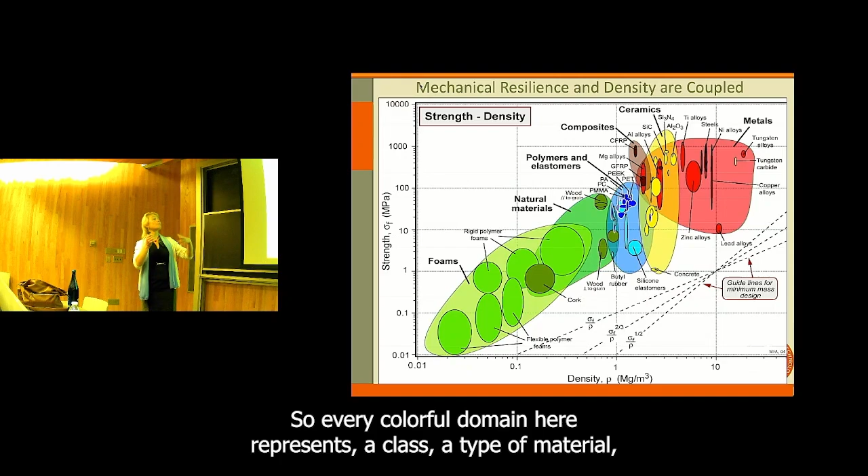Okay, awesome. All right, so every colorful domain here represents a type of material, a category of materials that we know how to make today. And so the picture that emerges right away is that we're very good at making materials that are simultaneously strong and heavy, or lightweight and weak, right?

So what we're not yet so good at is getting into the so-called white space, where materials can be simultaneously mechanically resilient and lightweight. Now, this is a log-log plot, so even a small increment within the space already represents a substantial change. So the question was, this is 10 years ago, how do we get into this white space if everything we know how to make today is already plotted here?

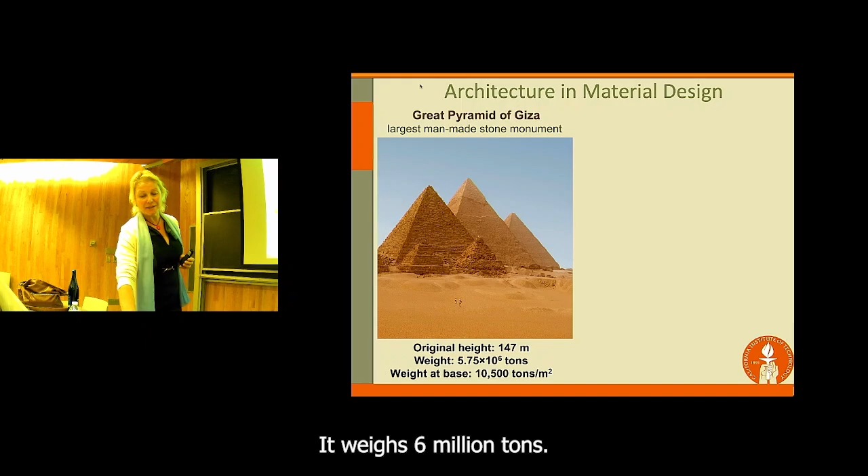So the way we thought of it is by applying this concept of architecture to materials design. So if you look at the largest man-made stone monument, this is the Great Pyramid of Giza, it stands 150 meters tall, it weighs 6 million tons, and certainly not a very elegant structure, I would say. So then, in contrast, the Eiffel Tower stands twice as tall, and it weighs 3 orders of magnitude less. And as far as I know, they're both still standing, right?

So what that tells us is that by properly architecting your structure, you can actually get away with using a lot less material without any sacrifice in the mechanical strength.

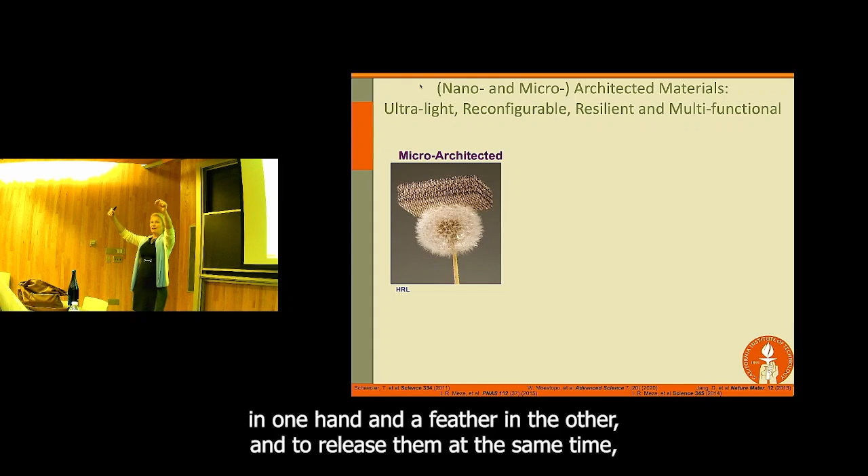So when we first began this research, we were collaborating with HRL, and we made an entirely nickel microlattice. So what you're looking at is the world's most normal dandelion. There's nothing photoshopped here, nothing unusual here, just a normal dandelion in Malibu. And this nickel microlattice is sitting on top of it, hardly perturbing it at all. In fact, if you were to hold the microlattice in one hand and a feather in the other, and release them at the same time, the feather would fall down faster. So they're very, very lightweight.

But to get to the simultaneous attainment of strength and lightweight, you have to go down 3 more orders of magnitude in the dimensional reduction. So all of these black and white images you're looking at here were at some point made by students in my group, and they're black and white because these are scanning electron microscope images.

You can see that there's an obvious level of porosity in that they're all cellular solids. There's a less obvious level, in that the nanoscale building blocks comprising them can be made hollow, with wall thickness on the order of 10 nanometers. So the smallest dimension in this entire solid that looks like a solid cloud sitting on your hand is only 10 nanometers—it's 99.9% air.

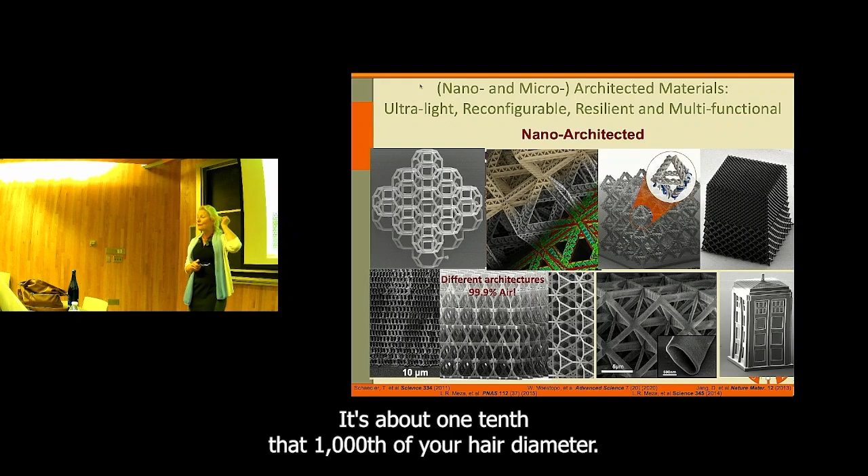Those of you who are fans of Doctor Who, here's a microtardis. It's about 1/1000th of your hair diameter—very small. We're not limited to periodicity. We can make very sophisticated structures, and I'll tell you a lot about this later. But basically, this is possibly the way—architecting and maybe combining these nanometer length scales with the size effect.

So what we're creating is ultimately not really a structure and not really a material—it's both. This is why we felt it was appropriate to call them structural metamaterials. Now, hopefully I've convinced you that these are very lightweight, but I have yet to show you that they are in fact strong and mechanically resilient.

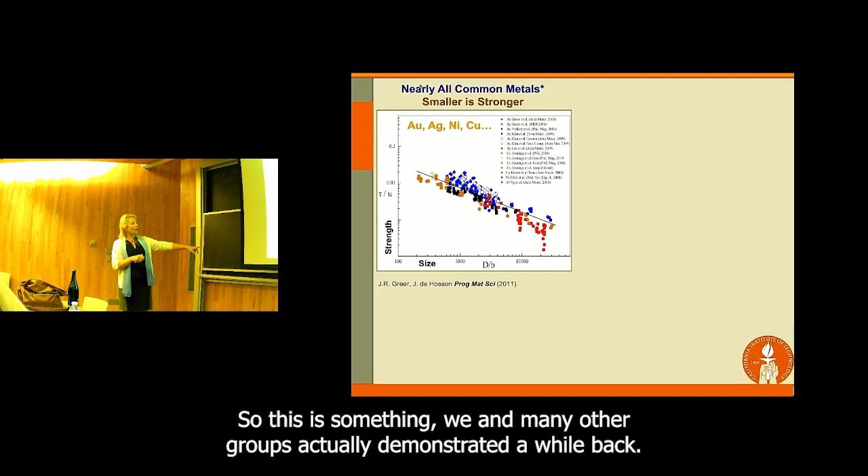This is something we and many other groups demonstrated a while back: if you plot strength as a function of size for common metals like gold, silver, and copper in their single crystalline form—meaning not defect-free, but without grain boundaries—we observed this ubiquitous smaller-stronger size effect. This is a power law type strengthening. So if you take something very malleable like copper and reduce its dimensions to about 200 nanometers, it becomes as strong as steel. Smaller, stronger size effect.

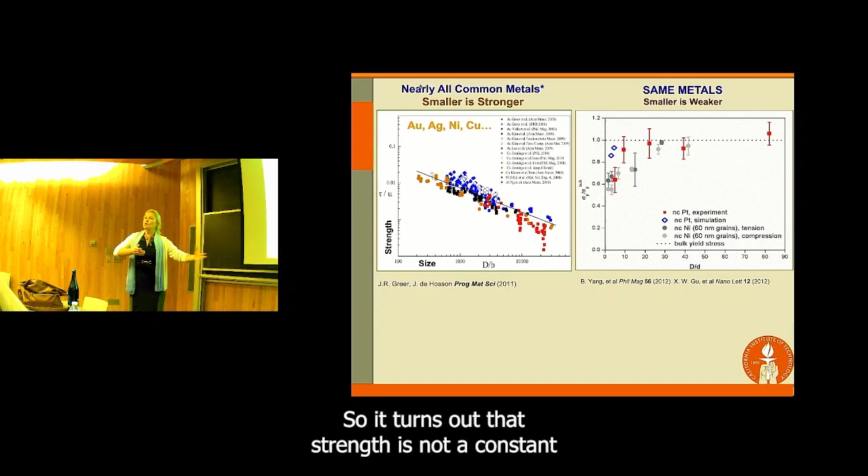Now, take exactly the same metals and deposit them using a different technique, for example thin film deposition, and suddenly this effect is reversed—smaller is now weaker. This is a more modest size effect, no longer on the log-log plot, but it's non-negligible. So it turns out strength is not a constant, like maybe some of you are learning in classes, but it's dependent on size when you get down to these nanometer length scales, like the architectures we were describing.

Here's another example of a size effect: this is a glass rod about 150 nanometers in diameter, and we're pulling on it at room temperature. Watch what happens—it's glass, room temperature, not hot. It's deforming, forming a neck, and deforms by about 100% strain prior to failure. Glasses aren't supposed to do that. Anyone who's really tried this, maybe with a piece of chalk, knows this isn't supposed to happen.

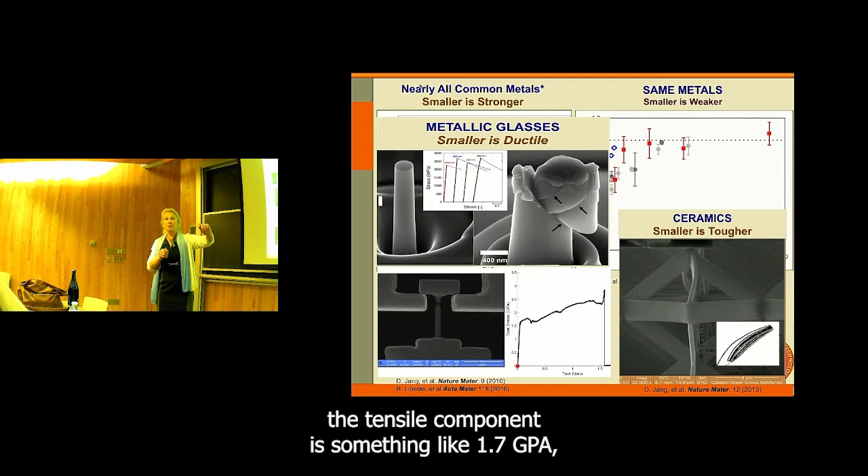Here's the last example: this is a titanium nitride single unit cell of one of those nano-architectures—a very, very brittle ceramic. This beam is bending under global compression. If you calculate the von Mises stress and then the tensile component, it's something like 1.7 GPa. Ceramics aren't supposed to stay intact under 1.7 GPa of uniaxial tension. This one is doing it over multiple cycles, and it'll keep doing this, I promise you.

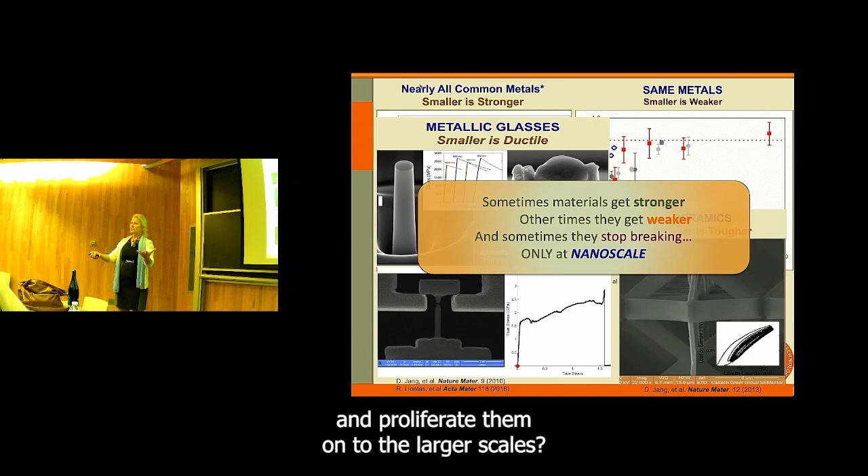So the takeaway message is this: sometimes materials can get stronger, sometimes they get weaker, and sometimes you can suppress brittle failure. But all of these effects emerge only at the nanoscale. So the big question to ourselves about a decade ago was: can we somehow harness all of these beneficial size effects and proliferate them onto larger scales? This is where architecture comes into play—can we combine these two phenomena into creating an entirely new class of materials?

So I want to spend a few words describing how we make them. This is a technique called two-photon lithography.

I have a question for all of you—do you have an instrument called the nanoscribe here? No, but we know. You know what it is. Many of us know what it is. Okay, I highly recommend it.

So this instrument is called—there's this company, Nanoscribe, that makes it. It's a two-photon lithography instrument, and the way it works is that it's an IR laser, and in a single voxel it releases exactly 2 photons.

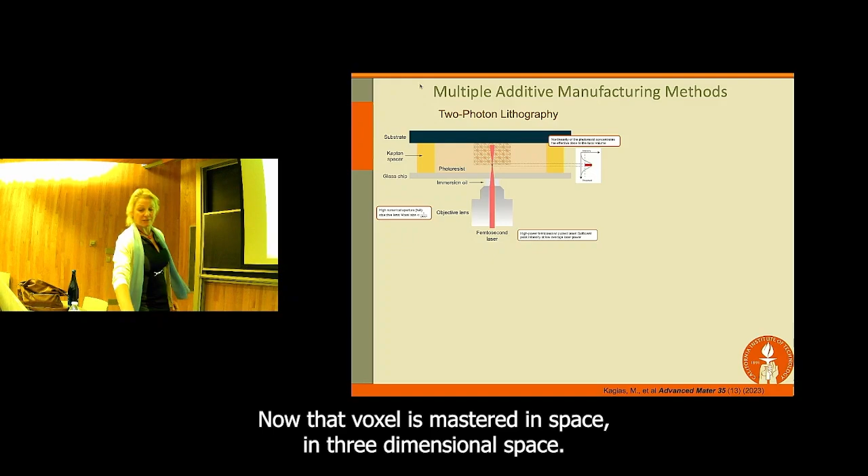And so this is how you can bring down the resolution to submicron and have a sufficient amount of power to cross-link the photosensitive resin within that voxel. Now that voxel is rastered in 3-dimensional space, and as it's traveling in space, it's cross-linking whatever shape it's trying to make, so we can write a nano version of each one of you.

Complexity comes for free. There's no mask, there's no periodicity, and that's how we were able to make things like the micro-TARDIS, for example.

So this is the speed at which it writes. How many of you think that this is fast? How many of you think that this is slow? Okay, and the rest of you are just not convinced. That's okay.

So it depends, you're right. Basically, this is great for lab research, but it's not great for manufacturability. If you wanted to make an entire world nano-architected, which is what I want to do, we can't really use the nanoscribe for that. So you have to figure out a way to expose maybe an entire sample or an entire field in a single laser exposure instead of a single voxel.

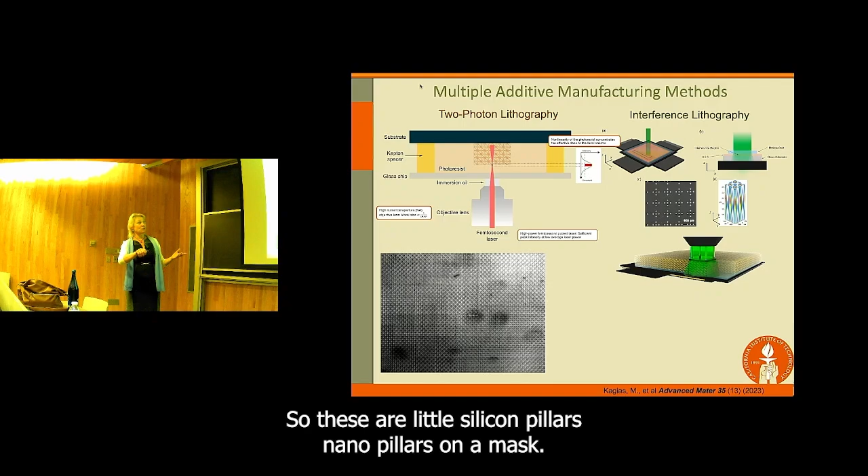And so for that, we developed a different technique that utilizes a metasurface mask. These are little silicon pillars, nanopillars, on a mask. What ends up happening is that when you shine a different kind of laser, a green laser, it creates a pattern of standing waves like so. All of these high intensity points also provide a sufficient amount of power for a different photosensitive resin to cross-link, and the entire field can then be cross-linked in a single laser exposure.

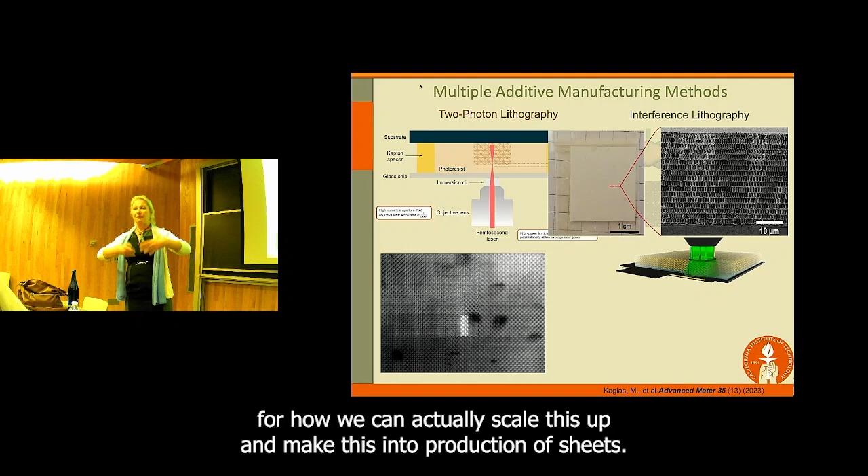What ends up happening is that you have, for us, this is very big - it's an inch by an inch sheet of paper, effectively. And when you look in the cross-section, you can see it's fully nano-architected. So this is one way for how we can actually scale this up and make this into production of sheets. That's another technique that we use.

And then we also, of course, are very versatile in terms of the 3D printing capabilities. In fact, my mischievous grad students made some very poisonous gummy bears, so I had to put big boundaries everywhere saying please don't eat these, because they're very, very poisonous, but very realistic looking.

Okay, so most of the samples we work with are kind of nano or micro scale, and we're not able to see them with any kind of optical technique. So this is a scanning electron microscope equipped with a nano-mechanical module that is capable of perturbing them in various mechanical and electrochemical ways at different temperatures. And these are different acquisition devices.

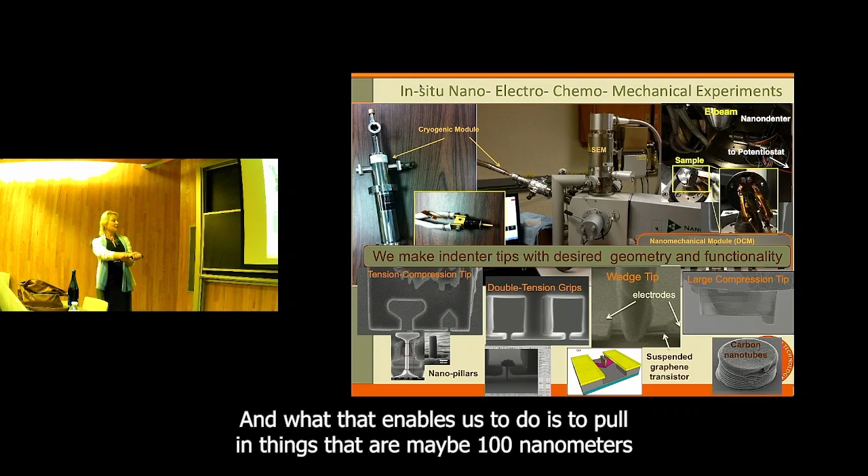So these are the kinds of grips that we make ourselves out of diamond. And what that enables us to do is to pull on things that are maybe 100 to 200 nanometers in diameter, as well as to perturb things that are many hundreds of microns in diameter. So there's a multitude of scales that we can probe.

Okay, so now that I told you how we make our samples and the hypothesis that we're trying to probe, here's the big experiment. This is my former student, Lucas Meza, who was first to do this experiment. This is an octet nanolattice. An octet is just a type of cellular solid that is stretching dominated, so it's supposed to be the stiffest of the classification. The wall thickness here is about 50 nanometers, so very small.

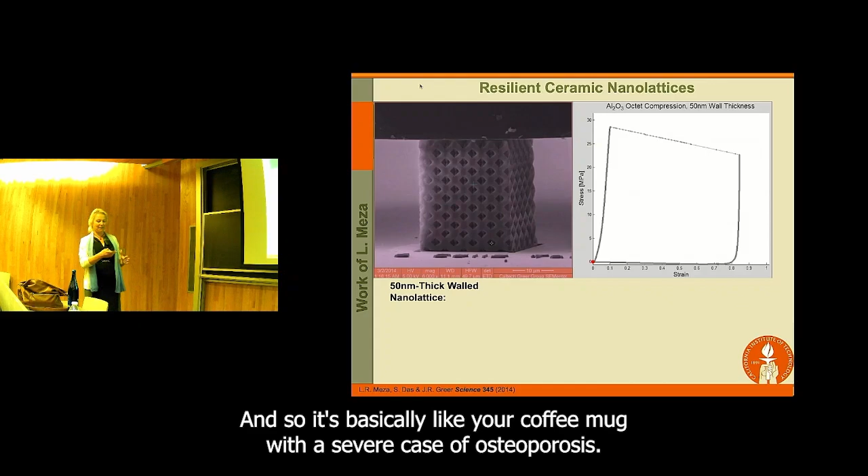It's about 99% porous. Now, how many of you know what atomic layer deposition is? ALD. Okay, alright. So in the ALD community, they'll tell you, we can deposit anything you want as long as it's alumina. So here's alumina, a very brittle ceramic, ALD deposited. It's hollow on the inside, so it's basically like your coffee mug with a severe case of osteoporosis.

And so when we compress it, of course, we're expecting nothing more than for it to crush and die and to shatter, and nothing interesting happens, basically, right? So that's exactly what we observed - a little bit disappointing, but we predicted this, right? So it crushed and died.

So now let's repeat this experiment, and the only thing that we're going to do differently is we're going to reduce the wall thickness by a factor of 5 - so instead of 50 nanometers, we're going to go down to 10 nanometers.

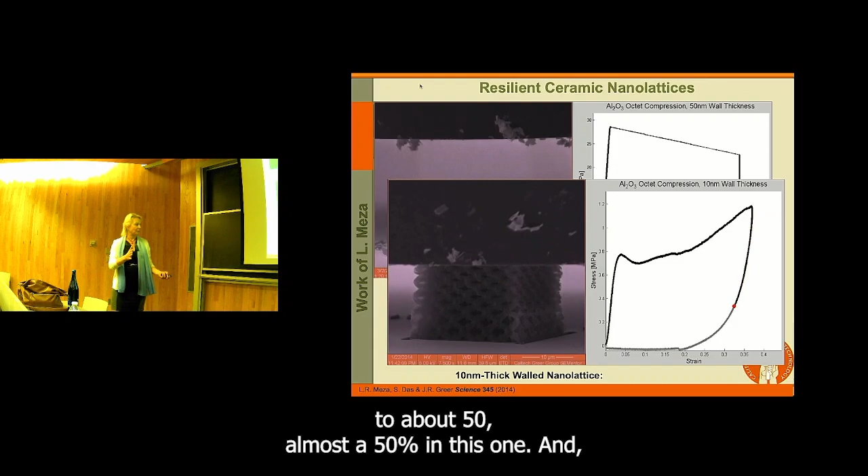Same alumina, amorphous, no dislocations, no grain boundaries, nothing of the sort. And we're going to compress it so it should be even more susceptible to failure, right? So now we're compressing it. It's very, very brittle, very ceramic, very open. We're compressing it to almost 50% in this one. And this particular ceramic thinks of itself as a sponge, so it fully recovers.

So if that doesn't convince you that there is, in fact, a size effect, I'm just going to fly back to California right now. This was a big finding for us. We hadn't expected this to happen. So now that we saw this, I'd like to show you all the things we've learned in the last 10 years since that very first set of experiments.

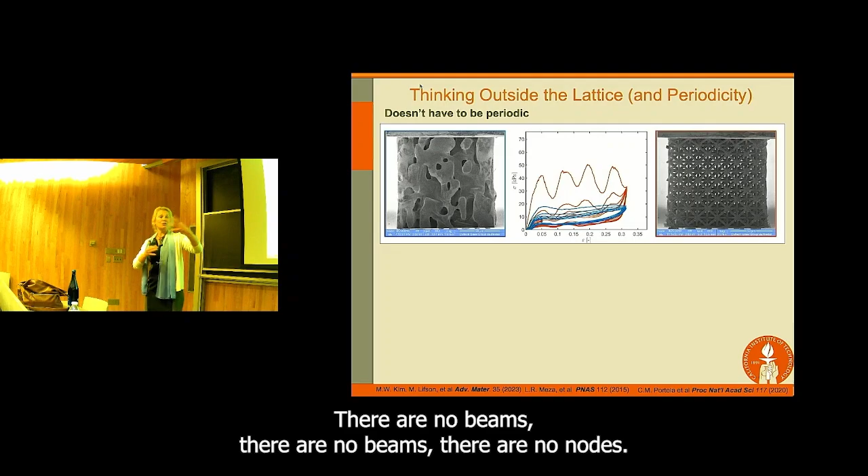The first thing we learned is that the nanolattices don't have to be periodic. In fact, they shouldn't even be called nanolattices. These nano-architected materials were made by my former student, Carlos Portela, who developed these nano-labyrinthine alumina architectures that are all shell-based. There are no beams, there are no nodes. And you can see that every time there's a hysteretic type of behavior, there's a lot of energy dissipation occurring, and there's always full recoverability.

The second thing we learned was that the structure doesn't have to have homogeneous density. In fact, you can incorporate different regions. This bottom part is more compliant, so it's fully densifying before the top part is even aware that it's being compressed. You can also see that reflected in the stress strain data. So now we can build in trajectories of deformation or even failure.

This is something new to us, studying fracture in these nano-architected materials. But we now understand how we can pre-design the trajectories into these materials. It turns out they're also very good for controlling breakdown voltage and supercapacitors. So there's multifunctionality that comes with these mechanical types of materials.

This is a hierarchical nanolattice. Each individual beam is now comprised of self-similar unit cells. And now what you're observing as you're compressing it is that there's kinking occurring in the lowest degree of hierarchy. So we're really expecting it to shatter right here, for catastrophic failure to initiate at this stress concentration—and it fully recovers.

So what we're learning is that hollow, brittle nanoarchitectures recover under complex stress states, in complex shapes, and under every kind of deformation. So this is not unique to periodicity. This is not unique to any kind of lattice behavior. Rather, it's a function of the combined size effect with the nano-architecting type of approach.

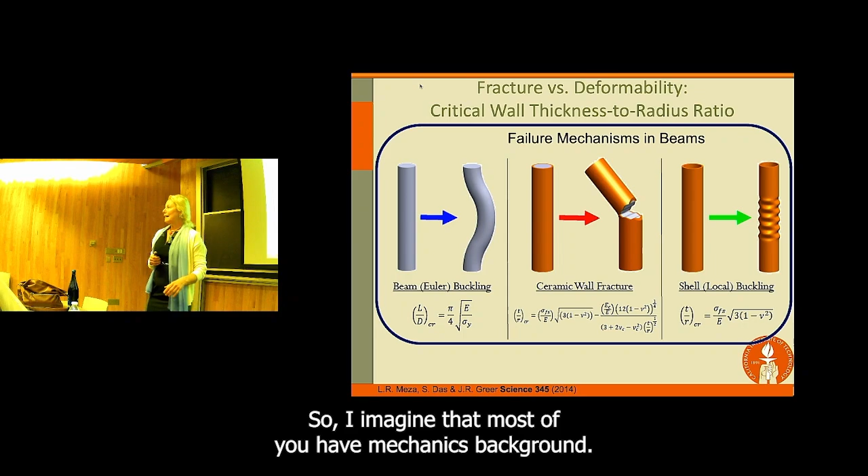That hollow—this is very important, actually. They're all hollow architectures. I imagine that most of you have a mechanics background. So we, of course, tried to understand why this happened. This is very unusual behavior, right?

So there's an elastic instability called shell buckling that could be the root cause of this. Like, that could be causing this. So as we're compressing a hollow beam-based architecture, maybe the reason why it's able to spring back is because it's experiencing buckling. So there's this type of criterion we can set for failure.

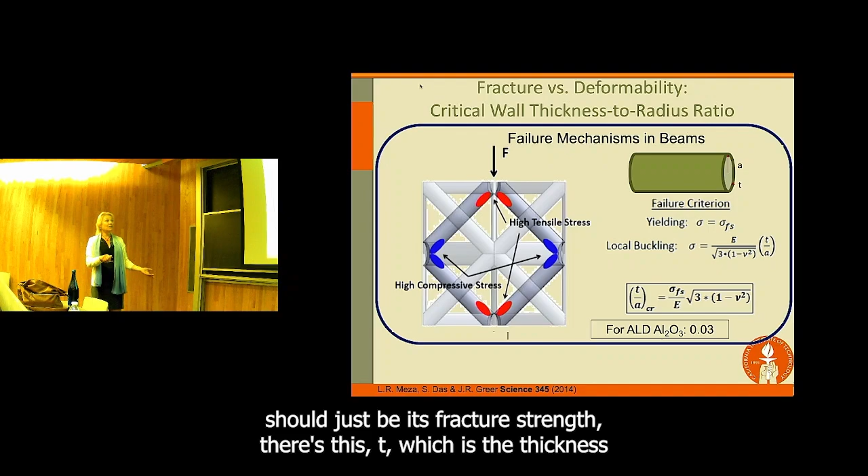So if we set up the criterion for local buckling and set it equal to yielding, which for a brittle material should just be its fracture strength, there's this T, the thickness of the hollow beam, and A, the radius of the hollow beam. There's this ratio, T over A, that can be calculated. This critical ratio implies that if the ratio is higher than that, your material will fail prior to buckling. And if it's lower than that, you should experience a structural response where you see buckling. So let's see what happens here.

So this is what mechanics tells us, right? It turns out that for the 10 nanometer wall thick nano architecture, the octet, that ratio is 0.016, so that's below 0.03. So it makes sense that it recovers. You can see in the data, these are different unit cell sizes, different relative densities, and it recovers every time—the sample looks very similar before and after deformation.

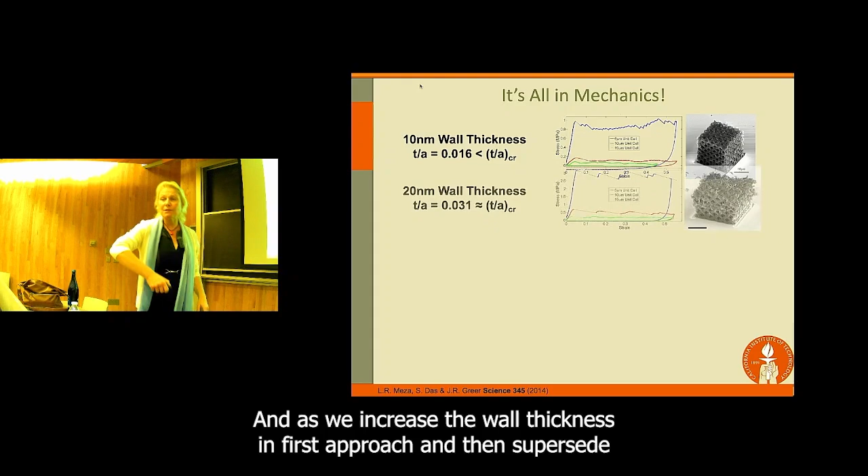And as we increase the wall thickness and then supersede that critical thickness, you see the deformation becomes a lot more catastrophic, a lot more jerky, and this last one just basically dies in a single burst.

So it seems like the answer lies in mechanics. Mechanics tells us everything, which is really great. If we were to build a building that's 10 centimeters thick with 3-meter diameter tubes made out of concrete, and then a giant came and stepped on it, the whole building would spring right back, just like our nanolattices. That's what mechanics tells us, as long as T over A is scale-free and continuous. It should work across scales, right?

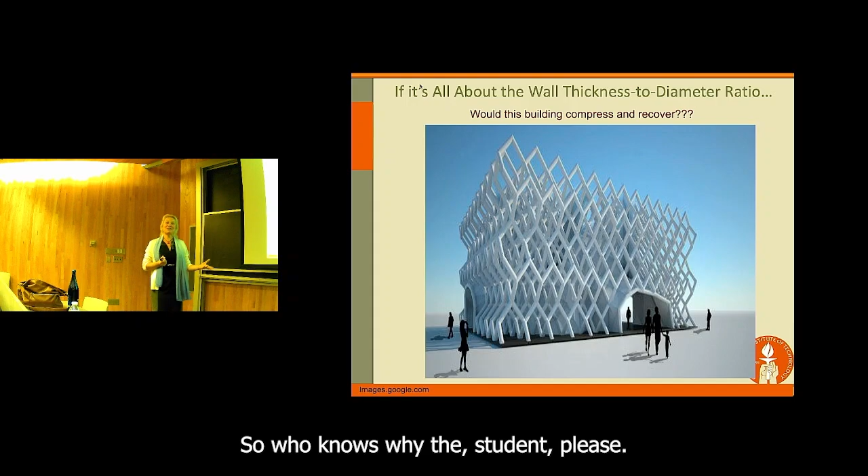Okay, well, good that you're smiling, because of course this will never happen. So who knows why? Where is the size effect here? How does the size effect manifest itself so that this would never happen in a building with the same T over A ratio, but it does happen in the nano-architected material?

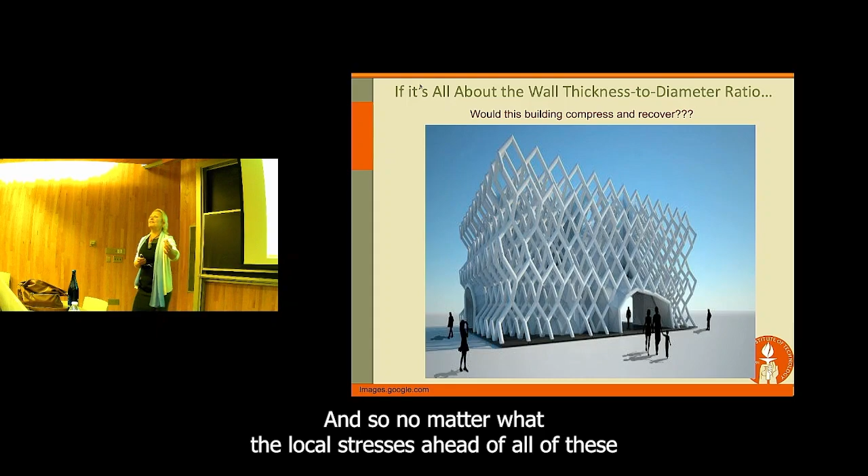Well, it begins with an F and ends with 'laws' - flaws. Brittle materials fail at flaws. The probability of finding a very broad distribution of flaws in something 10 centimeters thick is 100%. No matter what, the local stresses ahead of all these microvoids and inclusions will always exceed the material's fracture strength, so before the structure even gets a chance to experience any structural response, the material fails locally.

In contrast, in something only 10 nanometers thick, the probability of finding a flaw is much lower, and the size of the largest flaw is only 10 nanometers. So the size effect manifests itself in our ability to make much closer to ideal materials. If we filled this room with concrete, it wouldn't be as high integrity a material as the same volume made with nano-architected structures out of the same solid constituent.

Okay, so it's all about the defects - this is also very important. The natural question after that was: since we observed that the hollow, brittle building blocks always recover, what happens in the monolithic ones? Carbon seemed to be a good material for that.

So this is now monolithic - fully dense carbon. This is a carbon micropillar, and we're going to compress it. You've all written with pencils before, right? This is effectively pushing really hard on a pencil. Here we are compressing a carbon micropillar, and as we compress it you can see the stress scale - we're almost at 4 gigapascals compressive stress on carbon.

And it's certainly not enjoying itself, but it's not fracturing. It's bending, it's barreling, it's doing a lot of things. We're up to 7 gigapascals, and it's still not fracturing. That's unusual - this carbon thinks of itself as rubber.

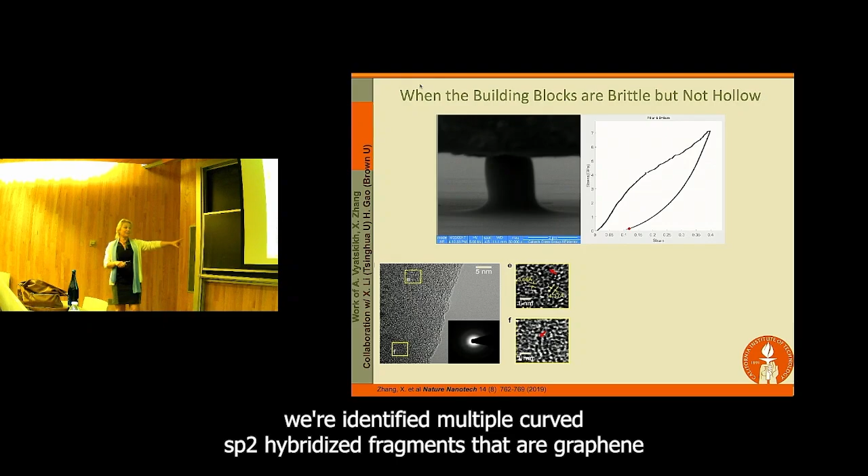Okay, so the first thing we had to do was explain why this happens. When we looked closely at the microstructure of this carbon, we identified multiple curved sp2-hybridized fragments that are graphene-like. Upon global application of axial, uniaxial stress or strain, they're able to transform in shear transformation zones distributed throughout the pillar, so that prior to any failure, they accommodate all of the axial stress through these shear transformations. These local shear transformations don't coalesce into brittle failure, or any kind of failure, for a pretty substantial amount of deformation.

To confirm this hypothesis, we collaborated with a group at Tsinghua University - Xiaoyan Li's group - who was able to reproduce that very same microstructure in their MD simulations. And then, of course, my former advisor Bill Nix always presents this challenge to me: don't believe anybody who tells you about ductility in compression - you can make anything ductile in compression.

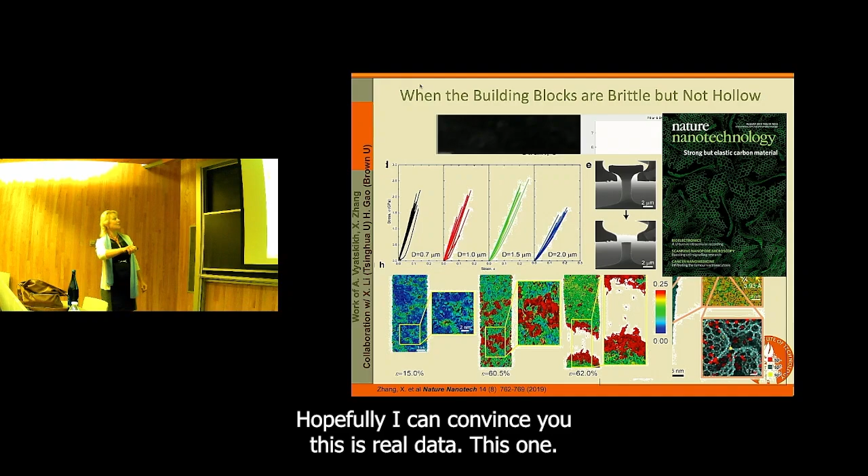So here's some tensile data - hopefully I can convince you this is real data. These are our carbon micropillars that very clearly show ductility up to about 20% strain at room temperature, so it's real. It turns out that our hypothesis was in fact true.

There are these small shear transformation zones, and you can see where the strain is localized into these. It's localized to a very high strain prior to failure, and only then does failure occur, once they coalesce and form a percolating path through the entire sample. So here we are - we made nanoscale building blocks that are fully recoverable.

We know why they recover. This is going to work great. Carbon is cheap, carbon is stiff, carbon is great. So we're going to go architect, right? March forward and architect with these.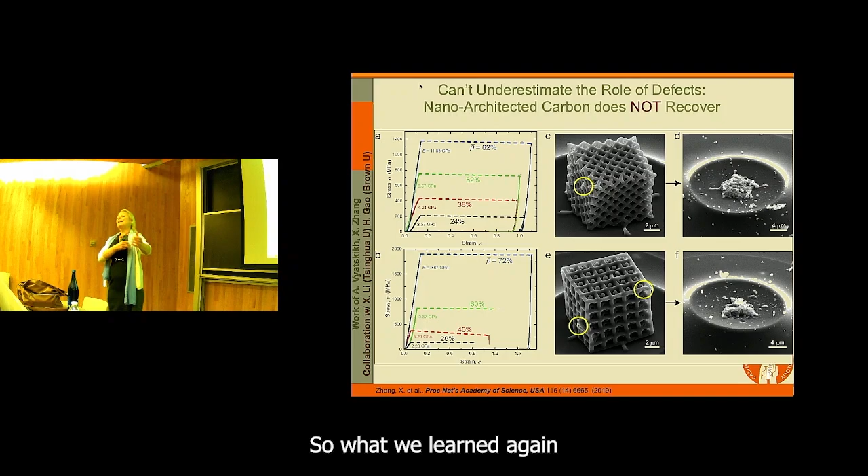What we learned, again, smacked in our faces, was that the importance of defects can be underestimated. So basically, every single time, the stress concentration at every junction was the cause of failure for the entire structure.

Having said that, I want everyone to appreciate this: brittle materials that are hollow always recover, while brittle materials that are monolithic never do. No matter what you make out of this, at least in our experience.

I want to bring everybody back to the white space structure parameter space that I showed. This is what I showed you before, and it looks like by just nano-architecting, we are in fact able to get into the white space. This is from a long time ago, so hopefully many of you can do better than we used to. So this is clearly a pathway to get into the white space, this combination of architecting with all kinds of nanoscale building blocks.

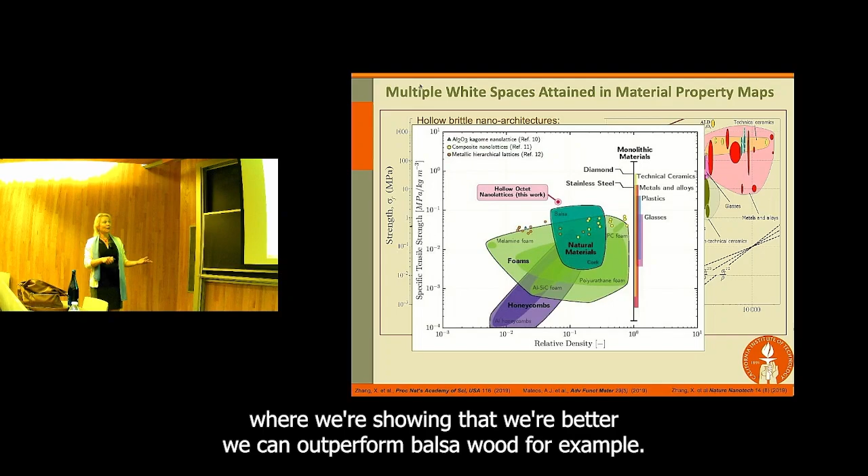We also learned that you can make your material look good depending on what you decide to plot. So for example, with specific tensile strength, we're showing that we can outperform balsa wood. These materials can always be made to look better than everything else - you just have to find the right parameter.

Speaking of this, I want to redeem the carbon a little bit. It turns out that the carbon points, right here, even though it failed every single time, it's the only material that approaches the theoretical limit. These are all the nanolattices, and they're all, of course, in the lower density regime - pretty far off from the theoretical limit.

We can also talk about how you define the theoretical limit for something at the nanoscale, and we can definitely have a discussion about this - that's why we put a ribbon here, because diamond and graphene are fundamentally very different carbon structures. Nevertheless, carbon is the only material in the low density regime that can get to the theoretical strength, so that's encouraging.

I also wanted to redeem carbon a little more. It turns out that we just maybe weren't doing the right experiment on the carbon. Up to this point, everything I showed you was quasi-static deformation. So my former student Carlos, who is a professor at MIT now, utilized this technique called LIPIT, laser-induced particle impact test, where he effectively shot microprojectiles at the carbon nanolattices and learned about their high-impact behavior.

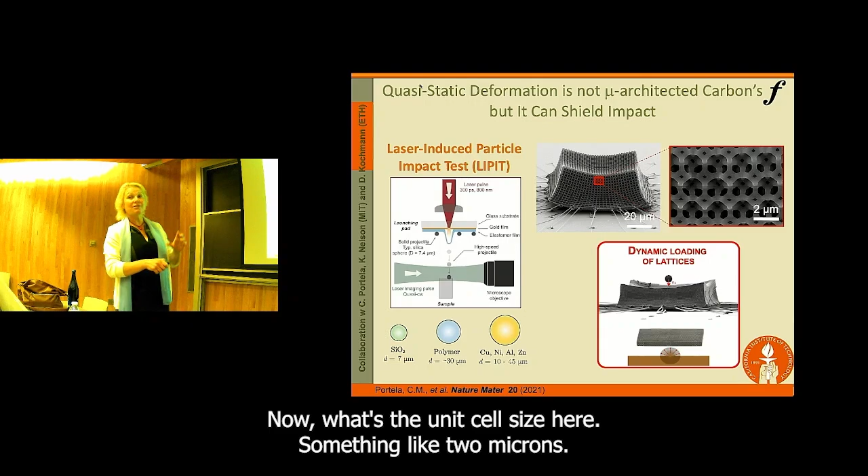So don't blink when I show you the movie. These are some of the nanolattices - not carbon nanopillars, these are carbon nanolattices, so now each individual block is kind of like one of those rubber nanopillars. Watch, the unit cell size here is something like 2 microns, so it's very, very small - there's a separation of scales. The projectiles are something like 30 microns in diameter. The idea is that the projectile is being launched at the lattice, and we're going to watch it happen, so don't blink. Here it comes. Did you see it? Okay.

So what Carlos learned is that there were three different types of deformation. The first was just the elastic rebound, where the projectile went somewhere and we didn't see much. The second was capturing the projectile, so it would get embedded into the nanolattice. The third was a combination of the two, where we had the permanent crater mark and then the projectile bounced. We never observed any penetration of the projectile into the underlying material, up to speeds of almost 1 kilometer per second. It turns out they're pretty good at impact mitigation.

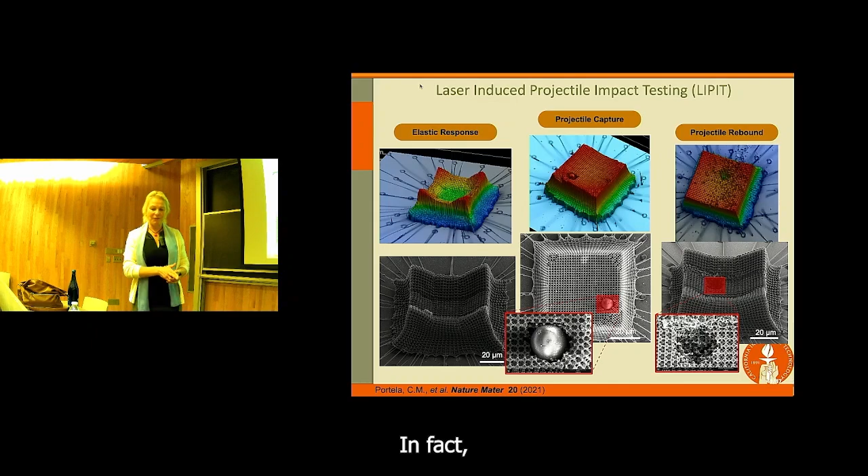In fact, when we plotted the rebound energy as a function of impact energy, we can see a big variation with the relative density - this is 23%, this is 14%. You can see that for these samples, we're getting pretty close to ideal impact mitigation.

When we compare our data, the red points are all the data Carlos collected with Kevlar and typical materials used for impact mitigation. You can see it holds its own pretty well and is pretty promising in terms of shielding impact. So we just weren't doing the right test on the carbon. That's yet another learning here.

Now, I mentioned a few times the importance of the nodes, and that basically nodes are kind of bad news. I want to really show this to you in our tensile experiment.

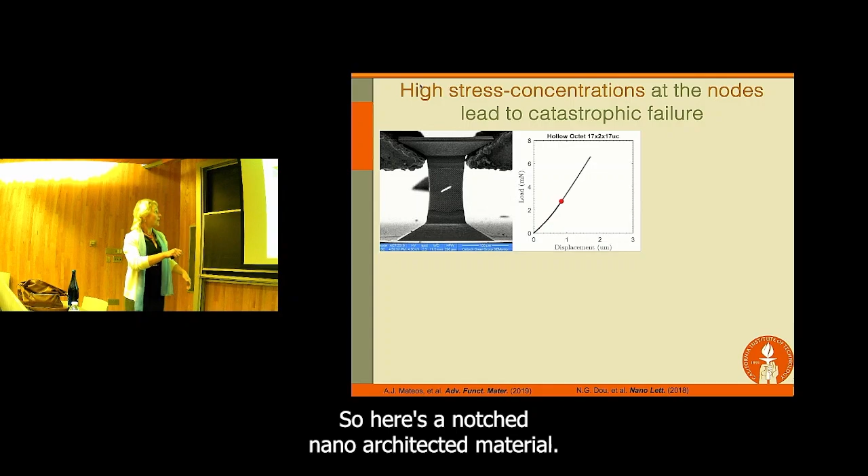Here's a notched nano-architected material, and we're pulling on it. As we're pulling on it, it fractures in a direction orthogonal to the load. We learned that no matter which way you orient the initial notch, it will always fail this way, and it'll always fail along the nodal plane.

You can see that each node contains a small crack, maybe, or maybe two, and they're certainly deformed and distorted in those locations. This happens in compression as well.

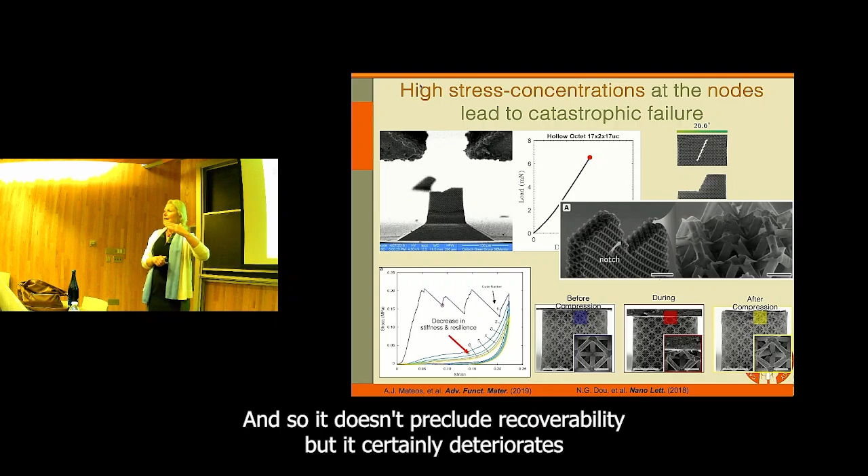The first cycle always looks different from the second through nth. Basically in the first cycle, we pre-damage the architecture where the nodes concentrate all the damage. So it doesn't preclude recoverability, but it certainly deteriorates the strength. So nodes are bad news, and structural defects in general are bad news.

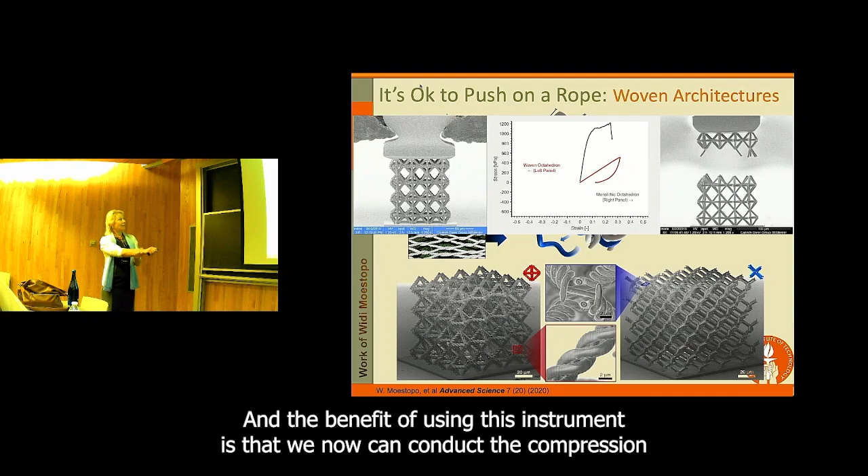Now I'm going to show you the deformation of the woven nanolattice on the left and the monolithic nanolattice on the right. You can see this one fractures right away along the nodal plane, and the one on the left never fractures. The benefit of using this instrument is that we now can conduct the compression and tension on the same sample. Here we had to kill another nanolattice.

But this one is the same sample that was tensed first, and now it's being compressed. You can see how much extensibility in both directions we can get out of these woven nano-architectures. When we plot the strain to failure, you can see how far you can push the limit of deformability of these materials. They're very compliant, but they're extremely resilient to any kind of breakage.

So this is one way of how one might avoid using nodes in their architectures. Now, what's interesting is to understand the mechanics of this, because instead of the relative density being a simple function of the slenderness ratio of your beams, now we have the effective radius. We have the small r star, which is the strand radius, and the capital R star, which is the effective beam diameter.

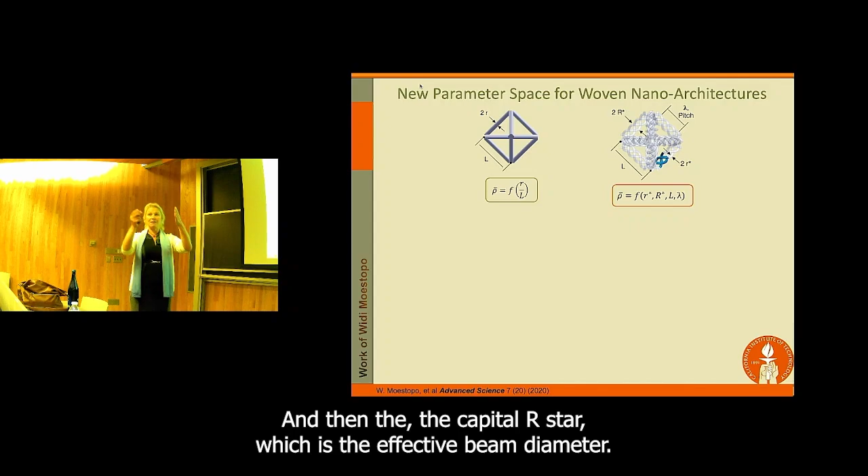From this, what Widi did, is he actually plotted the entire parameter space on the axial stiffness and the bending stiffness, which can be entirely controlled by these 2 distinct slenderness ratios, the effective one and the real one.

What's really nice about this is that if you think about applications like microneedles penetrating your skin, for example for drug delivery or patches, you can tune the axial stiffness while having the drug released from every surface of the triple strand. So now you can decouple the functionality from the mechanics and fully tune the mechanics to fit your end application. This is something we are very much working towards now.

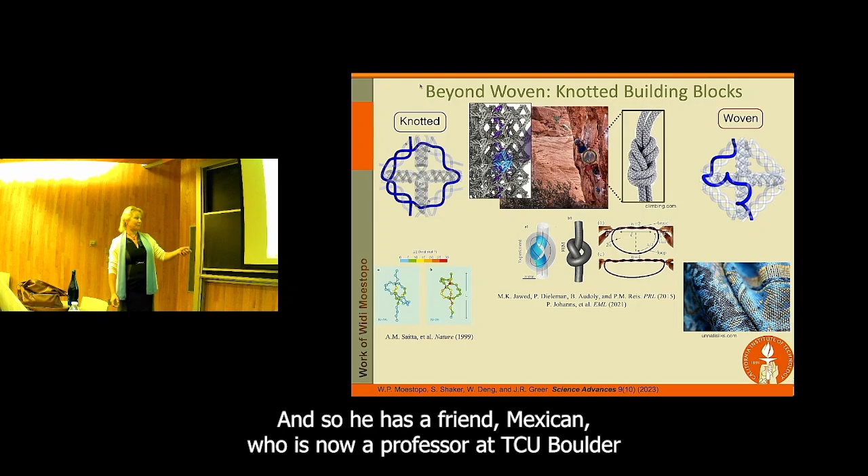But Widi didn't stop here. This was his COVID project. Widi has a friend, Max Saccone, who is now a professor at CU Boulder, who is big into rock climbing. Widi said, well, okay, there are a lot of knots involved in climbing, so why not make a knotted nanolattice?

It turns out this is actually a fascinating problem, has been a fascinating problem for mathematicians for a long time, understanding the mathematics and the mechanics of the knots. So let me walk you through.

So here's a woven nanoarchitecture where a single strand starts at the top and ends at the bottom, just following this trajectory through the unit cell. In a knotted architecture, you also have a single strand that starts at the top and ends at the bottom, but it makes a loop before it gets to the bottom.

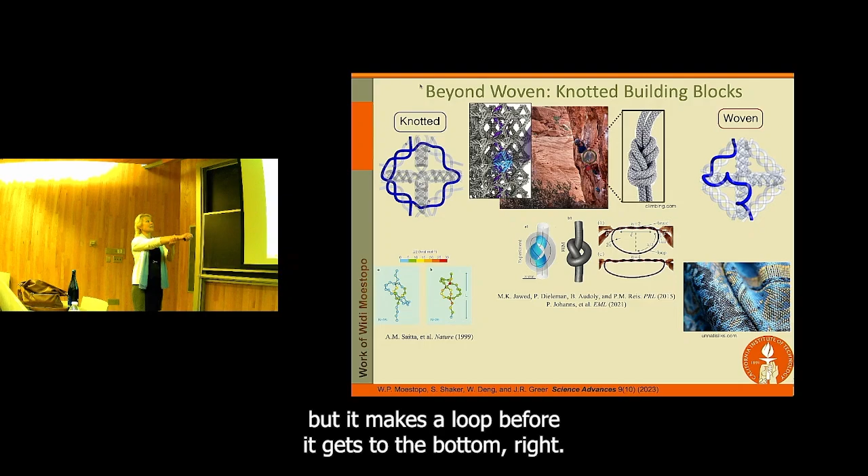So when you pull on it, what do you think is going to happen? It's going to unbend first, right? It's going to straighten out, and then you're going to pull on the strand and we'll see what happens. Here, you're going to first unbend as well. But after that, what's going to happen? Hopefully, you're going to start tying the knot.

We had never done this before, so we just did this last year. Knotted on the left, woven on the right. Here's the single strand that subtends all the way. So watch what happens.

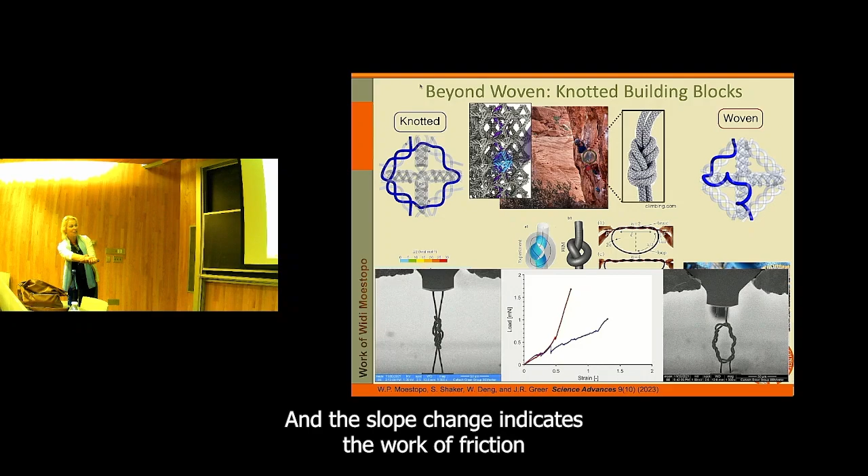First they start off together, because we're first uncoiling. And then the one that's woven shifts entirely into the stretching regime, whereas this one shifts entirely into a friction-dominated regime because now we're tying the knot, and the slope change indicates the work of friction that's occurring while we're tying this knot prior to failure. Look at this, it's 150% strain. So what we uncovered is an entirely new mechanism of energy dissipation available to nano-architected materials that we had never seen before. This entire thing is the work of friction by tying the knot.

So this was kind of a fun little project. It turns out that Pedro Reis actually did all this theory for us a long time ago. If you look at the knot geometry, depending on how many times it interweaves, there are several parameters that feed into this. We can gain some insights into friction at the nanoscale, because I would conjecture that friction at the nanoscale needs to be thought of differently from how we think of it in bulk. Because now we have surface stresses, terminated chemical bonds, and all kinds of functionalities and surface treatments like UV treatment that play into that. And now these forces become comparable to one another. So this is something that's worth studying, in my opinion.

Everything that's in red is something that we can measure in our experiment, and everything that's in purple is a function of geometry or material or how we designed it. So we have the knowledge of that as well.

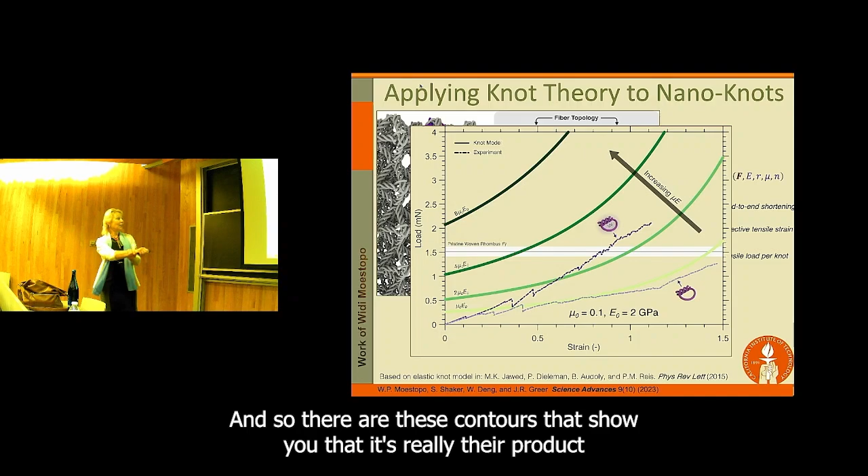When we do this experiment, we were able to show these contours of the product of the coefficient of friction, mu, and the elastic modulus of the material. These contours show that it's really their product that determines the load versus displacement, which we converted into strain response. Pedro even had experimental data showing that different surface treatments, which give a different coefficient of friction, for example with UV light, already show a shift towards the theoretically predicted behavior. So this was a neat way for us to study friction. If anybody is interested in friction at the nanoscale, I'd like to offer this as a useful way to do it.

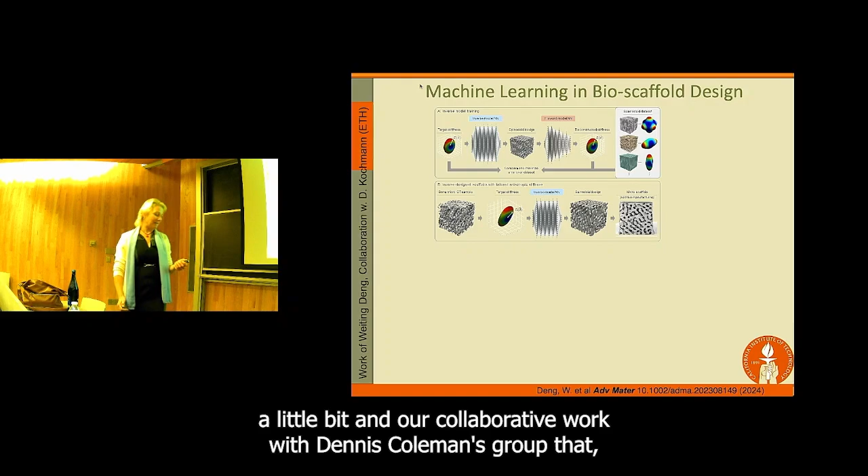Now, of course, everybody's doing AI right now, so I wanted to show a bit of our collaborative work with Dennis Kochmann's group that uses the forward and inverse model to predict the three-dimensional anisotropic stiffness of something that looks very complex.

This is actually trabecular bone, a real sample based on micro-CT, and this is the predicted architecture based on AI. My former student Weiting was able to demonstrate that when you take this AI-generated model and make a sample out of it, it looks very isotropic. You wouldn't be able to tell by looking at it whether it's isotropic or anisotropic, and you certainly would never be able to infer what the stiffness is.

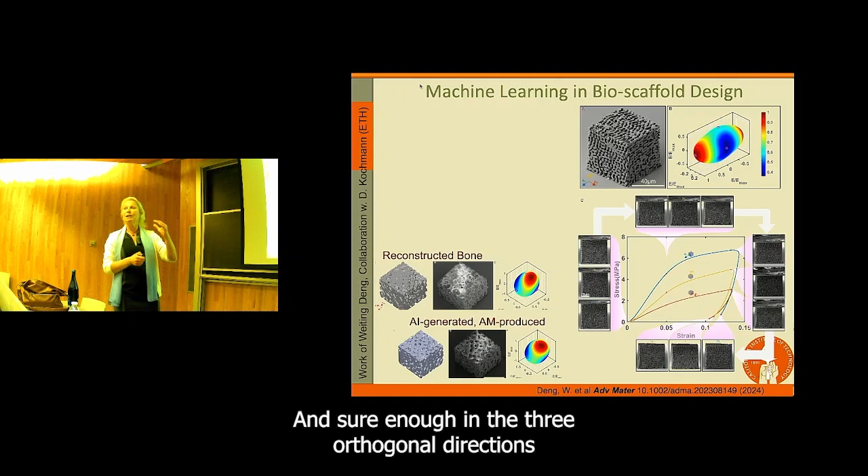Dennis's group predicted that this would be the stiffness surface, and these points are the ones we measured experimentally. Sure enough, in the three orthogonal directions, you can very clearly see the stiffness increasing.

So now you can design very complex architectures that are entirely unpredictable using any kind of theory or even FEM simulations, using this kind of AI-based design. So this was kind of a neat finding.

Okay, I'm going to shift gears, and I'd like to ask if anyone has any questions right now, because I'm going to switch a little more towards additive manufacturing. So this was kind of more mechanics heavy.

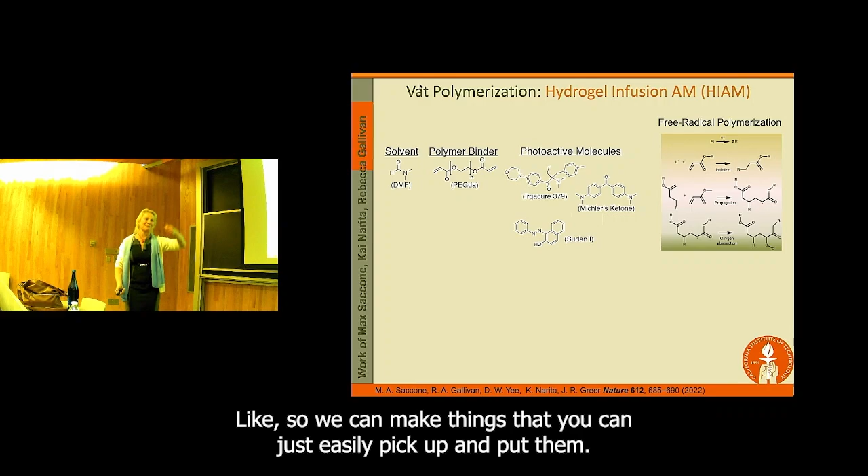Welcome. When are you going to explain how you're going to scale this up? I did, I showed you my interference lithography. I know, it's really hard. It's really hard. I want that building that you showed. I do too, actually, my students say to put the airplane on a shelf. I don't know where that came from. You used it in one of your TED Talks. Why would you want an airplane on the shelf? I don't know, but that's the idea, right? So we can make things that you can just easily pick up. Yeah, it's a big problem. Scaling up is a big problem.

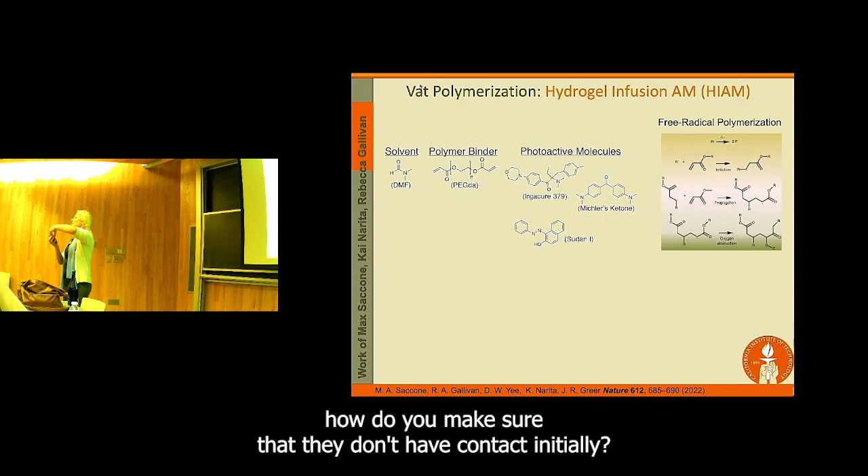Can you briefly describe how you make that three-stranded wire? Yeah, so it's the nanoscribe, that instrument. It's not very easy, but if you know what you're doing, you can make it. It's not something that will require, like, a PhD student can learn it in a couple of months. You really do need the nanoscribe, though. There's no 3D printer, no other instrument we've been able to convince to make something like that, because they would be touching. Our main problem was how do you make sure that they don't have contact initially? That's hard, because you have some diffusion during polymerization. Yeah, but the nanoscribe should be able to do it.

When you make them out of superconductors or semiconductors, probably, right? So we haven't really studied this, but the kinds of materials we've worked with so far don't really have a band gap. That would be in the semiconductor world. So if we were to go in that direction, I would expect some coupling, yeah. We're not quite at that scale yet, and not quite in that material space yet. Yeah, thank you for asking.

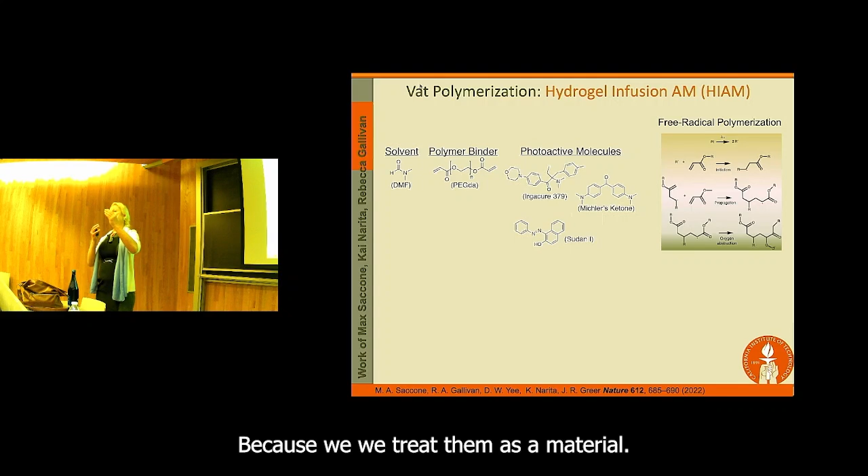Yes, so that's a great question. It's not local stresses and strains, we want to think of these as materials. So it's, of course, the homogenized global stress and strain, because we treat them as a material. And you would have to do pretty sophisticated either MD simulations, which have unrealistic strain rates and don't really account for the global structure, or continuum simulations, which don't really account for any kind of atomistic variations or defects. So either way you look at it, there's really no better way that I can think of right now to represent the holistic picture, so we think of them as materials for now.

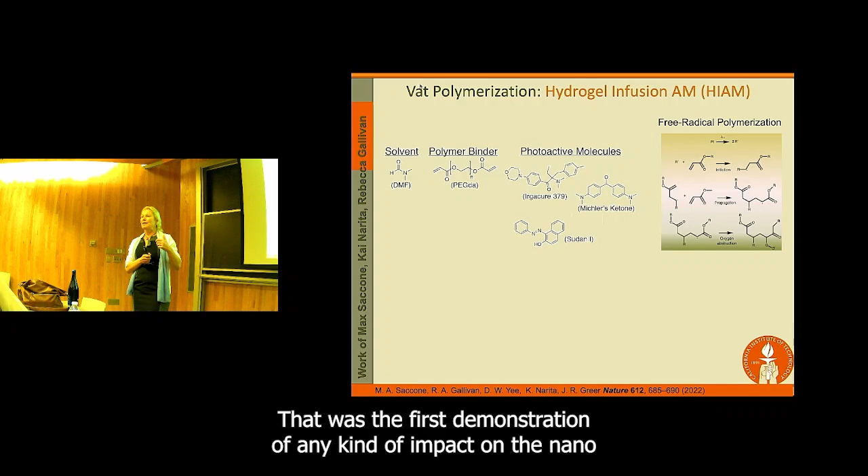So okay, that's a great question. It's not fair, it wasn't measured on the nanoscale, so it's not a fair comparison. And so what we're doing now is we're making composites with these nano-architected sheets, and then we'll compare them to the very same dimensions of Kevlar samples, and that's a much more fair comparison. That was the first demonstration of any kind of impact on the nano-architected layers, and at that point it made sense to compare them, but at different length scales, it's not fair, and you're absolutely right, yeah.

Thank you. Okay, so in the interest of time, I'm going to move on. How many of you are polymer chemists or know anything about polymer chemistry? Yes, great. So the rest of you, please just bear with me, it's going to be a little bit of chemistry.

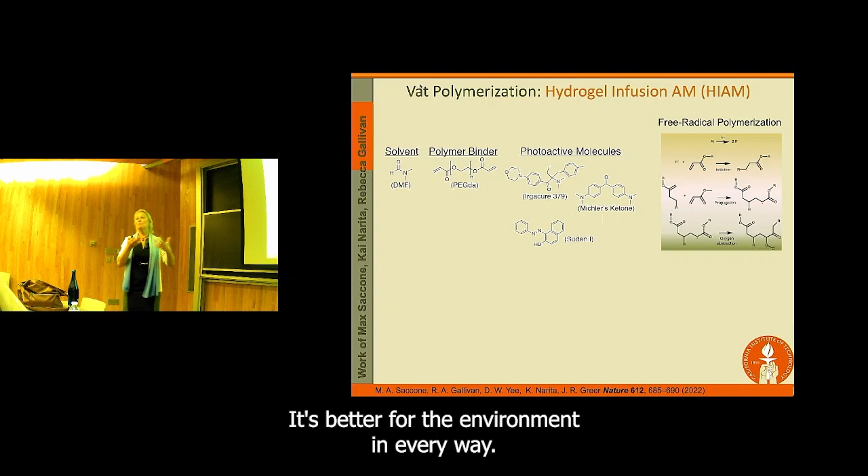So when you work with a nanoscribe or with any kind of 3D printer, typically you would go to some manufacturer to buy your resins, right? And that's actually how they get you, because they charge a lot of money for it. So if you have very clever Caltech students, you can start synthesizing your own resins. And we've been very interested in hydrogel-driven synthesis, because it's not toxic, it's much more sustainable, it's better for the environment in every way. So this right here is PEGDA, it's polyethylene glycol, it's a hydrogel. And this whole cocktail represents all the necessary chemistry to initiate a free radical polymerization. So when you start with this cocktail in its liquid form, and you initiate this, that's how you 3D print, effectively, right?

So you cross-link the polymer under the effect of that particular light. This is a UV 3D printer. This is not nanoscribe, this is UV light.

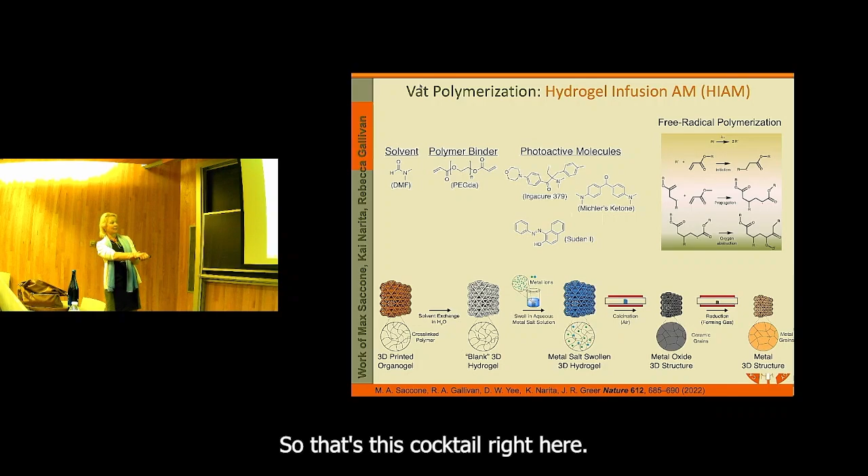What my former student Max did is he developed this additive manufacturing process in a way that involves hydrogels and metal salts. So when you start, we first 3D print this organogel, that's the cocktail right here. Then he exchanges the solvent with water, so it becomes a blank hydrogel, and then he infuses it with metal salts. This could be silver nitrate, copper nitrate, etc. Just some regular metal salts, nothing sophisticated here.

He then subjects it to a two-step thermal treatment. One of them is called calcination, where we basically burn off all the organic content to produce a metal oxide. And in the second step, we reduce it to the parent metal.

Everything you see here is a schematic, okay? Everything on the next slide is a real image, so it's a very pretty project. You can see we begin with organogel, here's a hydrogel, turns into clear. Then the turquoise copper nitrate salt is the typical color for that. Then the copper oxide, this is a solid now, not a hydrogel anymore. This is a rigid solid copper oxide, and then it turns into copper metal.

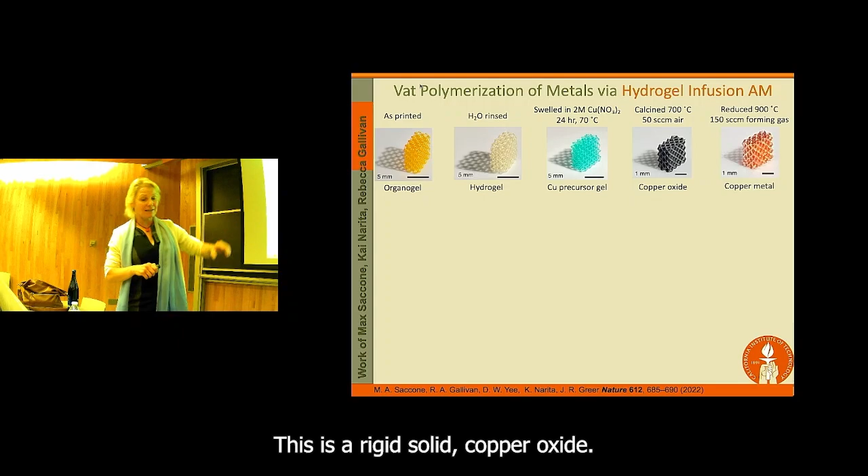Max was pushed to demonstrate this process, which we coined hydrogel infusion additive manufacturing, or HIAM, for a variety of different metals. What we're observing is that you can, of course, have metals of a single composition. But what's much more powerful is that we can make metal alloys, and we can make high entropy alloys, and we can make alloys that are very hard to form, for example, tungsten.

So this enables a massively parallel experimental approach where you can make a lot of hydrogel blanks and then infuse them with different salts, creating kinetically driven, in addition to thermodynamically driven, microstructures. One consequence of this was that we end up with some very weird microstructures.

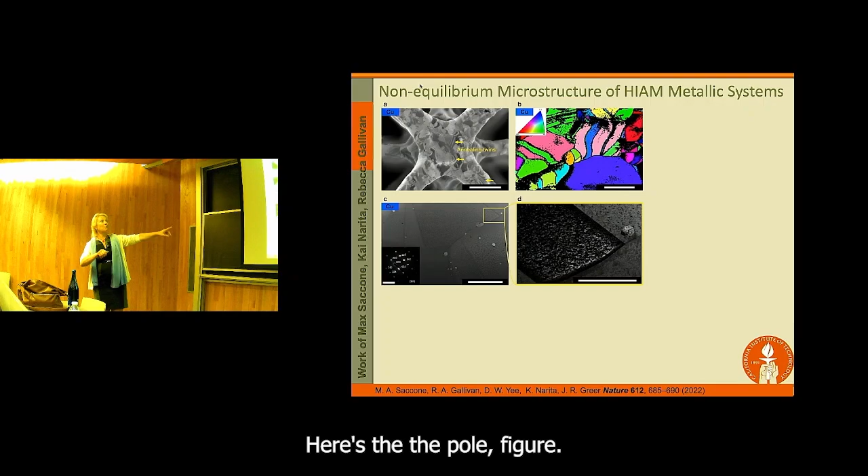So this is an EBSD map, which shows the different colors corresponding to different crystallographic orientation of the grains. Here's the pole figure, this is copper. What we're observing is that it forms a lot of annealing twins, so this microstructure is very heavily twinned. It's polycrystalline, doesn't have a particular texture. So this is kind of an unusual microstructure.

There's a lot of kinetic effects, right? Because you're reducing your copper oxide into copper, there's a lot of oxygen diffusion concomitant with sintering, with grain growth, pore formation, and atomic diffusion. So there's a lot happening at the same time.

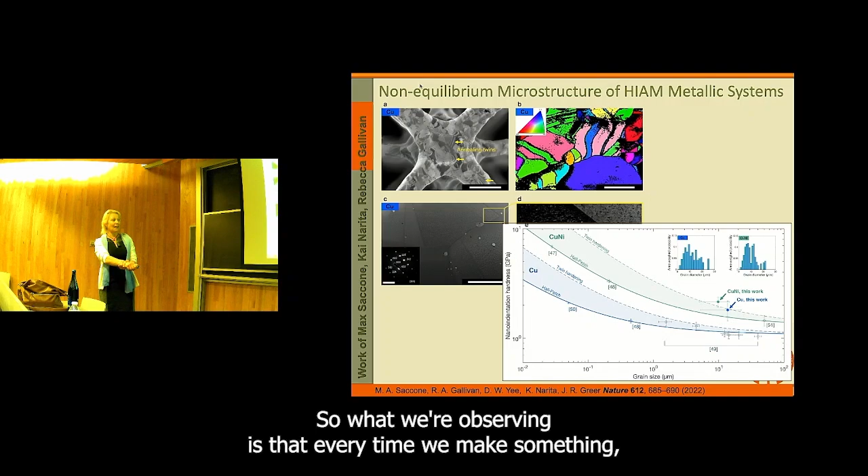What we've learned is that every time we make any kind of metal using this HIAM process, the strength is elevated pretty substantially. Even when we correct for the presence of these twin boundaries, we can account for some of the strength enhancement, but not all of it, and we're not sure why. Every time we make something, it's stronger than what would be produced using a regular process, but these chemically derived metals have all the normal characteristics like conductivity and microstructure that copper would have, they're just a lot stronger. So there's something to think about there.

So then the next natural step was, can we push this process to the nanoscale? Everything I showed you just now was micro, you can touch it with your hand, you can see it. Can we push this to the nanoscale? Because this is where interesting things are, hopefully I've convinced you of that.

My student Wengshen developed a different cocktail for the nanoscribe. Now we're going down to that super fancy two-photon lithography approach. We started with a simple geometry, decided not to go to the nanolattices right away. She just made a nanopillar, a nickel nanopillar, well, she's trying to anyway, to make a nickel nanopillar.

So here's a nickel infused polymer, we have the nickel nitrate salt in it. It's mostly hydrogel, and it's very small. Here's the reaction that converts the nickel nitrate to the nickel oxide, and so here's our nickel oxide pillar. We're almost at the finish line, right? We haven't yet reduced it to nickel, it's nickel oxide.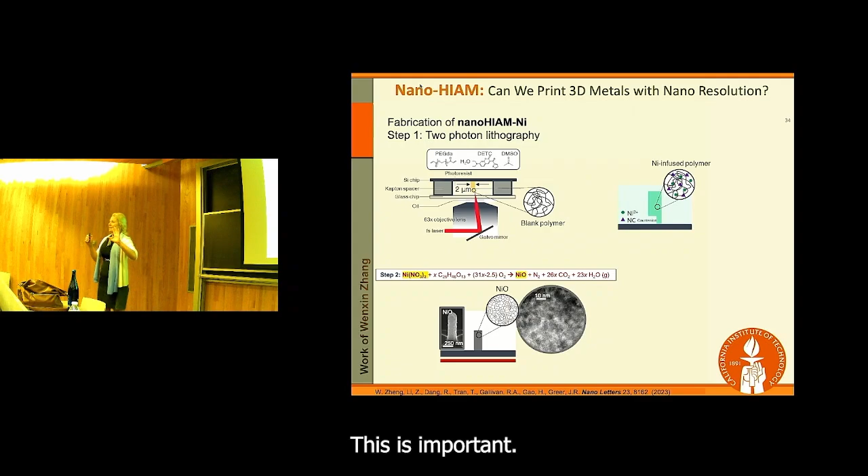What we learned is that it's nanocrystalline, not amorphous, and this is important. So now we know the only job that this pillar has to do is convert its nickel oxide grains into nickel grains, and that's it. So what kind of microstructure should we expect in this one nanopillar?

I just went over all the processes that are accommodating this transformation. There's definitely oxygen diffusion, there's pore formation. There's a lot going on.

So the candidates are: it could be single crystalline, very surface dominated, since these pillars are 200 nanometers in diameter. We could have driven out all the grain boundaries from the original nickel oxide grains. It could be nano-twinned, since we've seen the formation of twins. It's pretty likely to be nanocrystalline, in fact, because it's nanocrystalline in its oxide precursor phase. And it could also be nanoporous, because the oxygen is diffusing away, so there's probably some pores.

Okay, so I want you to vote. This is not the sad voting that just happened a couple of days ago. This is a much more exciting voting.

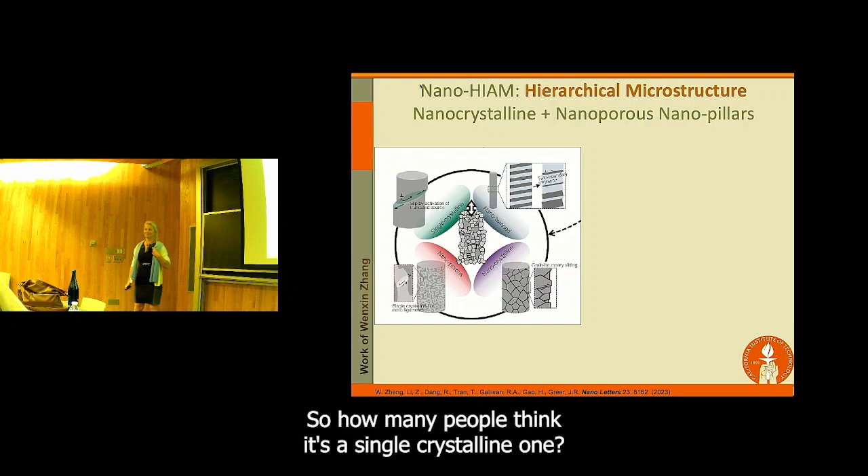So how many people think it's single crystalline? You may vote once and only once, but you have to vote. One, thank you, your team single crystal, awesome. How many people think it's gonna be nano-twinned? Okay, great, nanocrystalline, team nanocrystalline. Everybody else thinks it's nanoporous? Because you have to vote, okay, all right.

Okay, are you ready? It's all of the above. It's actually remarkable, this single nanopillar is so hierarchical and so complex in its tiny little body.

Oh man, so look at this. This is the cross-section in the TEM. This right here is 25 nanometers. So there are grains populating the walls, but it's a bamboo-like structure, so it's exactly one grain across, with multiple grains stacked on top of one another. There are a lot of pores.

There are some single crystalline ligaments that we saw. Here's the nickel wall right here, so you can very clearly see the twins, very clearly see the grain boundaries. And here are some of the satellite peaks in the diffraction pattern that show you the presence of twins. So it's every single one of those microstructures that I just showed you.

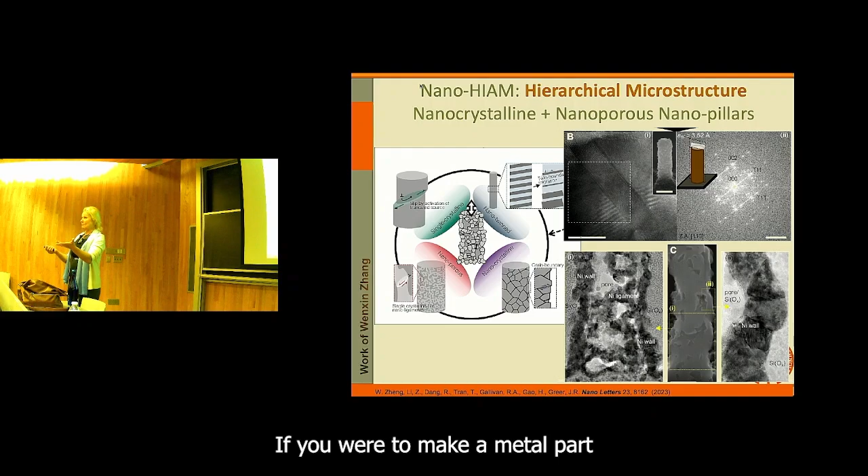What is remarkable is that at the bulk scale, this would be considered a very crappy microstructure. If you were to make a metal part that had nanocrystals, nanotwins, pores, and everything, it would be thrown away. So then, of course, we now need to do some nanomechanical experiments.

So we have this approach where we do these experiments in situ so that we can watch the deformation. We just recently, a couple of years ago, got this amazing instrument called Femtotools. If you don't have that, I highly recommend it. I think it's the only instrument that's able to do true displacement rate control, not inherently load-controlled like every nanoindenter is. Wasn't Bill Gerberich in this department?

Yeah, here's some. So this is not the Hysitron like Bill Gerberich used to use, this is not a nanoindenter. This is an entirely new approach, and it's actually a great instrument. So we're doing this in a focused ion beam. Here's the setup of the instrument.

So we're able to observe the deformation even on something as small as this nanopillar, and we can see the deformation. 145 nanometers - do you guys know how small that is? It's very small. So it appears that in this particular sample, it kind of sheared off along a particular shear plane.

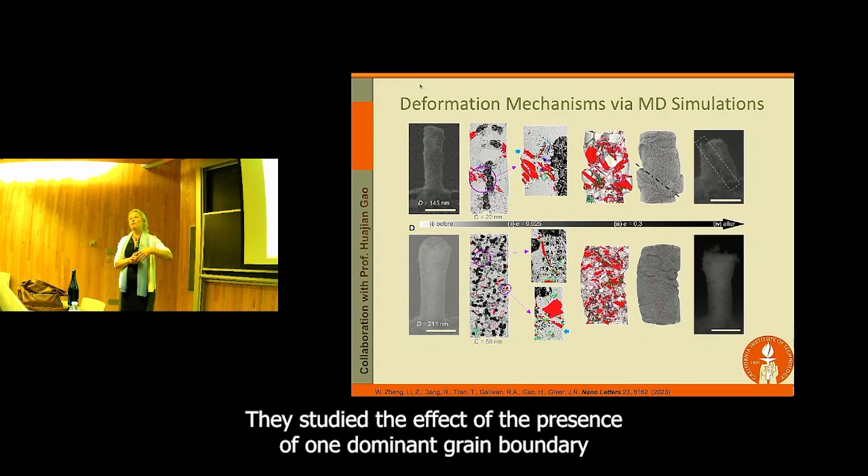So we collaborated with Huajian Gao's group on conducting molecular dynamics simulations, again putting in the microstructure we're observing. It appears the simulations are able to reproduce the deformation we're observing experimentally. They studied the effect of the presence of one dominant grain boundary versus not having it, and it appears it's always basically grain boundary dominated plasticity. So every time we push these pillars past the yield point, they always undergo this grain boundary assisted deformation.

But here's the exciting part, I think it's kind of exciting. So when we plot the stress as a function of pillar diameter, and there's quite a bit of literature now on the deformation of nickel specifically, here's what emerges.

This is only nickel, no other metals being compared. This is that smaller-stronger size effect shown before in single crystalline nickel. Single crystalline nanopillars always have this strengthening slope of 0.6 to 0.7, while the nanocrystalline pillars are always weaker than their single crystalline counterparts.

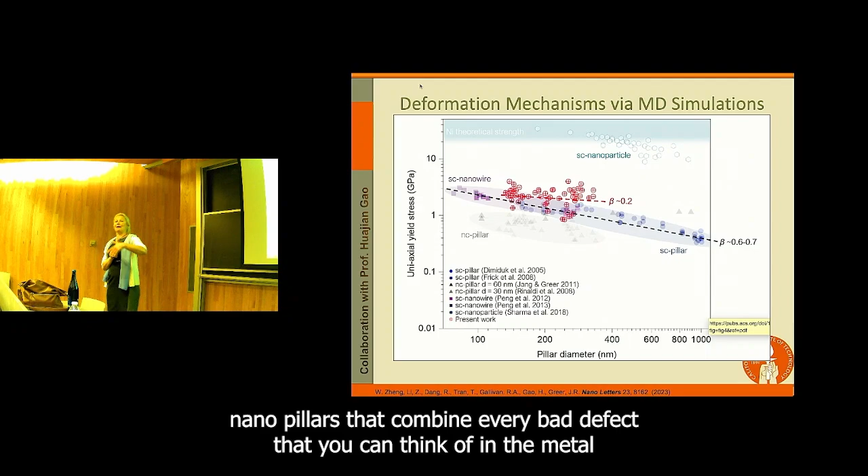Here's our data. What we're observing is that these very crappy nanopillars, combining every bad defect you can think of in the metal microstructure, are stronger than all the other microstructures of nickel, and they're a lot less susceptible to the size effect. So they don't lose their strength when they become larger. In the nano world, everything is upside down.

The real answer is that we're observing a structural response in a tiny nanopillar. Because our length scales are so comparable now, the length scale of the defects and the length scale of the sample are so close to one another that our structures can redistribute the load much more efficiently, instead of catastrophic failure like you'd observe in bulk. So we got structural response out of a 150 nanometer pillar.

I have one last topic on soft plasticity. Do we have like 5 minutes? How many people care about soft matter here? Nobody cares about soft. We have to do it very quickly.

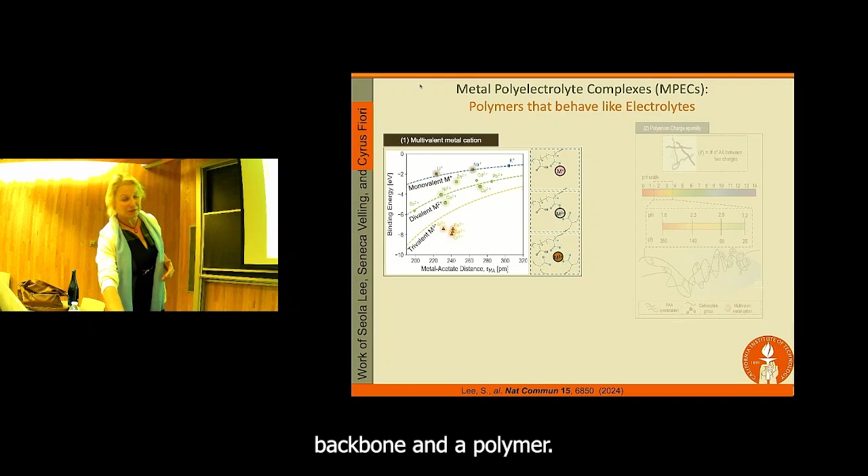We've been working with a very interesting class of materials called metal polyelectrolyte complexes. The idea is that you have a metal coordinating with a polyanion backbone in a polymer. Here's the metal cross-linker, and when it cross-links into a gel, it forms something we can print with. The first thing we demonstrate is that we can use metal ions as the cross-linking agent for printing. There are monovalent, divalent, and trivalent metals.

It turns out there's a big difference in their mechanical response. When we pull on the aluminum gel, it's very stiff and not very stretchy, but a calcium gel, same gel just with a different metal ion, stretches tremendously. When we plot this, we observe a very big difference between monovalent, divalent, and trivalent metals.

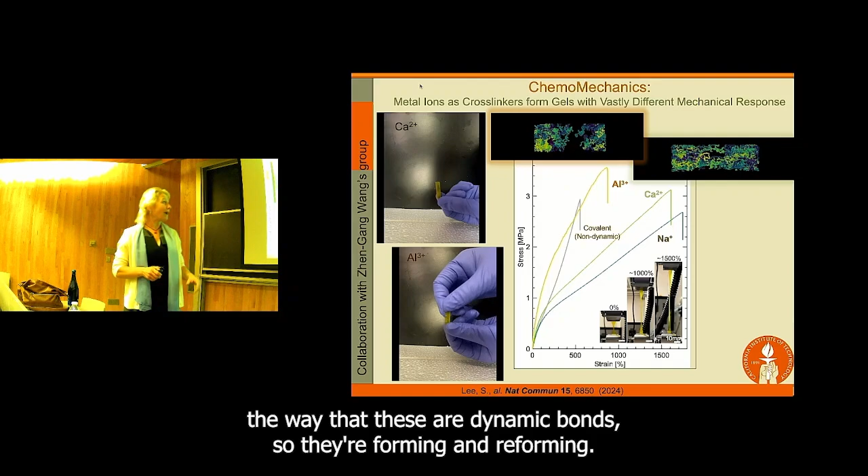It turns out these are dynamic bonds, forming and reforming. In the divalent case, like calcium, you see more homogeneous stretching. In the trivalent case, the way the metal ion coordinates with the polymer backbone forms clusters, which makes it stiffer and a lot less stretchy.

When my student Seola looked into the mechanical effects and time dependence of these viscoelastic materials, she uncovered that when you plot strain versus time, there's a crossover point between a divalent metal like nickel and a trivalent metal like aluminum.

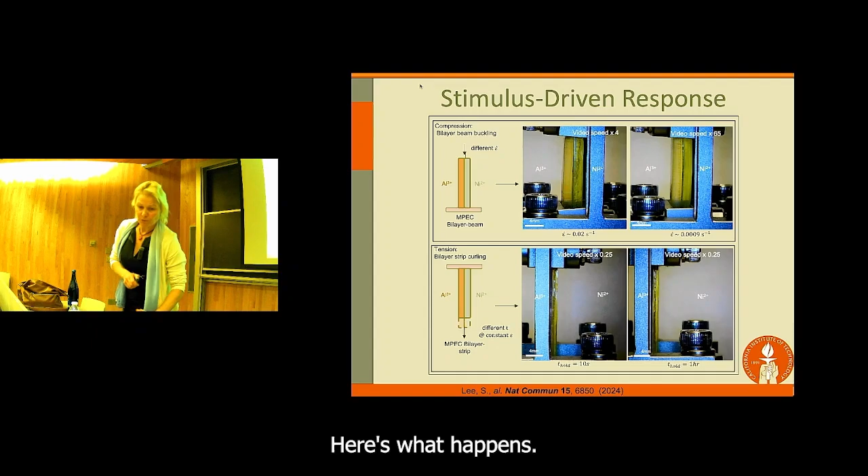Here's how it manifests: if you make a bilayer strip with aluminum on the left and nickel on the right, and compress it at a strain rate of 0.02 per second, the structure buckles because it's very compliant gel.

Now we take essentially the same sample and do the same experiment, but at a much lower strain rate of 9 times 10 to the minus 4 per second. You can see it buckles to the right because of that crossover point. So now we're playing with the relaxation time against the experimental time frame on these polymer systems.

This also manifests in stress relaxation: if we hold it for 10 seconds, it curls up after the experiment, and if we hold it for 1 hour, it curls by a lot more. I put this in for Dick because we have shape memory effect in these. When we make a flower shape and lock it in, everybody loves the tulip shape for some reason. When we program the shape at 90 degrees and relax it, here's the calcium and here's the aluminum.

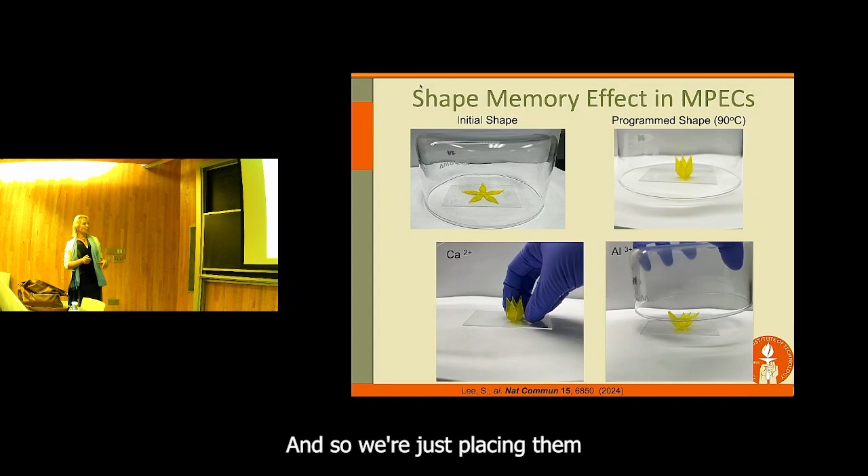And so this is at room temperature now, and we're just placing them on a glass slide. You can see that the aluminum one blooms right away, and then the calcium one takes a lot longer to bloom. They both return to their original program shape, so there's a shape memory effect in these.

Okay, I think this is one last thing I want to show. Okay, this is a battery. I wanted to show you a little bit of the multifunctionality of these.

This stimulus can be made different. In this case, the stimulus is electrochemical. It's in fact a battery, and you're looking at it from the top. When we lithiate it, you can see what's going to happen.

It forms this pattern. So I'm a musician, to me they look like violins. They are sinusoidal patterns that form as a result of lithiation. So instead of the silicon fracturing, the beams now bend to accommodate the triaxial stresses of the lithium being inserted.

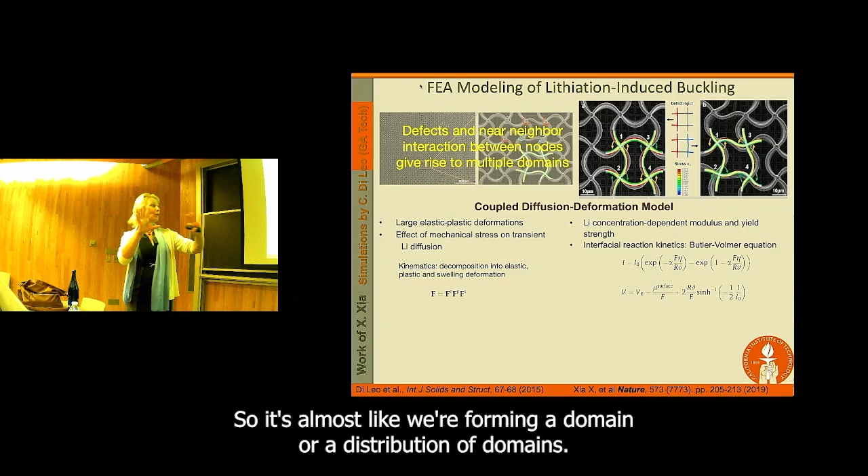What we observed is that sometimes when these nodes counter-rotate, it creates mode 1 buckling, but when they co-rotate, it creates mode 2 buckling. So it's almost like we're forming a domain or a distribution of domains. The FEM simulations show very much the presence of both types of modes of buckling.

The color here represents the lithium concentration of the lithium diffusing into it radially. My student Xiaoxing noticed that when you change the lithiation rate, in fact when you speed it up, the number of domains increases and the domain size shrinks.

I don't know if you're familiar with the Ising model, but it looks like the Ising model, which basically involves a coupling coefficient between adjacent nodes, can really explain this. Xiaoxing started using this to program defects into a structure.

So this is a battery, and we hid a pattern into it. You guys don't know what this pattern is yet, and what I'm going to do is simply lithiate this battery. You don't know what's hidden in there, we might have programmed something in, maybe we didn't. All we're going to do is now just lithiate this structure.

This is a very, very legitimate battery, and hopefully you can see that the image that emerged in there has a lot of resemblance to my little logo. Okay, so that's the end.

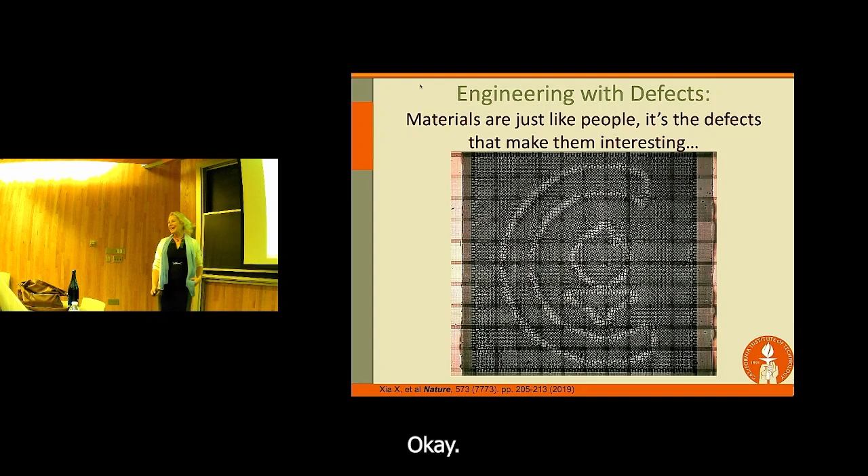So then, very relevant here: why did you show us this? Hopefully I was able to show you some interesting, thought-provoking videos and some data.

I would argue that if you're careful about controlling three very critical things - one of them is the atomic layer microstructure, the atomic level microstructure of your material. Is it amorphous? Is it nanocrystalline? What is the atomic level microstructure?

The second one is the size effect. Every class of materials exhibits a size effect, and you need to know where that transition length scale is, because only then does it become interesting.

And then the third one, of course, is the type of architecture you're making, like some of the beautiful structures that you guys make here. What are you making it for? Do you want more surface area? Do you want more stiffness? What is it that you're going after?

You can create entirely new classes of materials with uncoupled properties, which we hadn't been able to do before.

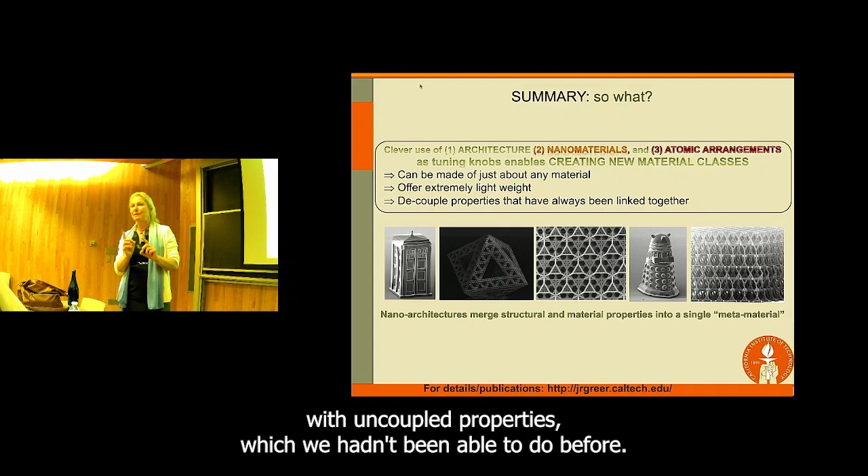The reason why you might want to do this is so that we'll live in a world with no hearing aids, because we can just write the cochlea bone and put it directly in your ear someday. Your iPhone 83 won't need to charge for about a year. We can make much better batteries now, right?

Did you know that helium is actually a precious resource? So if vacuum is lighter than air, if we can make balloons out of nanolattices that are not porous, we can evacuate it and use just vacuum and stop using helium. Almost relevant for the season - the Christmas ornaments won't shatter.

This is my favorite example, so brownies, right? Our latest, greatest pursuit is chocolate nanolattices, which are 100% taste, 99.9% air, and 0.1% calories.